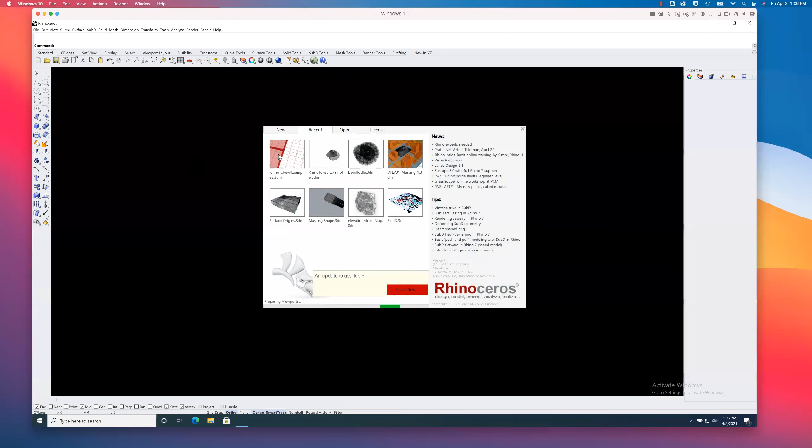We're going to talk about a couple of different ways you can begin to think about your skin or envelope. This is not the only way, but when it comes to thinking about, for instance, curtain wall, some sort of panelizations, I've done a few things in Revit as well as Rhino. I'll talk about that and show you where we're going to go, and then we'll do this from scratch, step by step.

Just waiting for this file to open, which is weird because it was working just fine not too long ago, and I literally was working on this for the last hour and a half or so.

What's annoying is I was trying to figure something out and I never did for one key thing. I guess that's a weekend project for me, in between doing some gardening and cleaning the house.

Come on, I'm kind of getting nervous here. I don't know why this is taking so long, it's not a particularly huge file or anything. All right, unable to zoom, no objects available. Okay, because I have everything turned off.

Perfection. Okay, so I took a piece of, in this case, I think it was some sort of figure-8 Klein bottle thingy-majigger. So I sampled, like if you thought about the figure-8 being swept around another figure-8 or something, it's kind of a weird thing. I sampled just a slice of the pie, so to say. You can see, before I started to break this up into 3 different surfaces, this was one surface that intersected itself right here. I broke that up, and I'll show you how I did that in a moment.

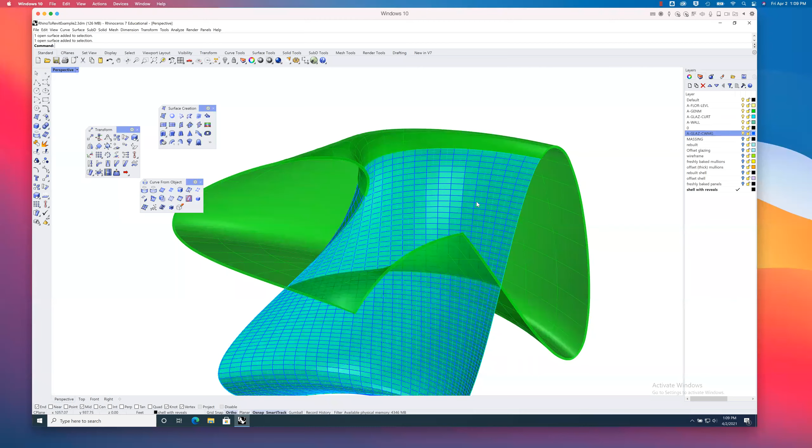So here you can see the glazing. There you can see what I guess was part of the other thing that I offset into a sort of shell. There we go, curtain wall, mullions. I'll zoom in on this a little more so you can see it better.

In this case, I took something doubly curved and instantiated a curtain wall system across it. You can see there are sort of 2-inch mullions running across this thing. You can see the glazing, and actually, well, it's kind of particular, pretty interesting how Revit handled this. In some places it handled it like a pro, and in others not so much.

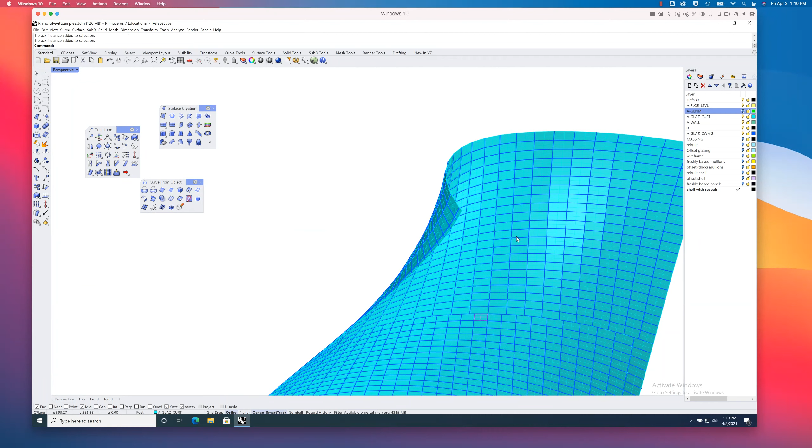Which is kind of interesting. I'm not here to judge Revit, I gave it a pretty hard scenario to try to resolve here geometrically. But anyway, I ended up with something like this from a curtain wall. Again, these are two different sort of systems. I don't like, maybe I was using different parameters for them at the time because I did them at different times, as well as offsetting something, given it thickness.

So this could be a pretty dynamic space where the outside is actually solid because it's facing the sun, and then facing a sort of courtyard over here on the right-hand side, I have basically glass, something like that. I was just ad-libbing here on what this could be, since I was sampling a portion of it without a whole lot in mind. Didn't want to take too long, just thinking of some sort of hypothetical.

So I'll talk a little bit about that back and forth between Rhino and Revit. I'll take this, we'll bring it into Revit, and I'll show you how to do that step by step. It's not intuitive, in my opinion, unless you're really into Revit and importing things from other places into Revit. So we'll talk about the nuances of that, as well as what you can do inside of Revit.

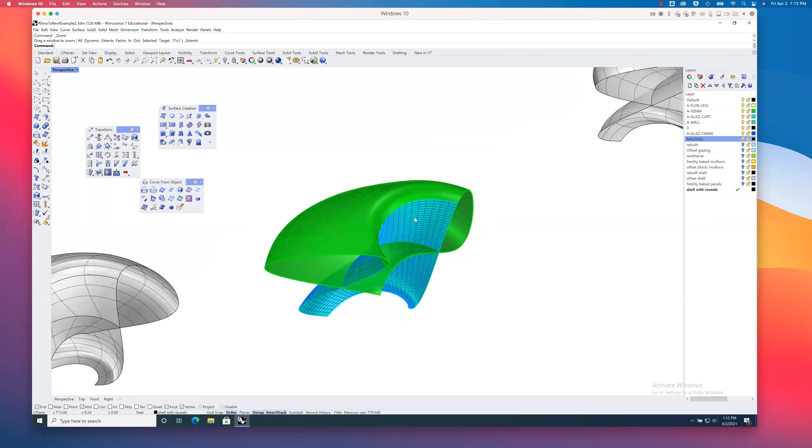Another thing Revit had a hard time doing is I could make sort of curved geometry walls, but it wouldn't let me do wall reveals in them, which is a real pain, because that's how I like to do maybe some aluminum panels, or some sort of zinc plated panel bond or something. So it ended up having to do some things in Grasshopper that I thought otherwise I could probably just do with a couple clicks in Revit.

So here again is another set of examples I did this time in Grasshopper. I'll show you guys again, I'll build that from scratch. What I did is I took the original massing.

I took this sample for what I wanted glazing curtain wall to be. I rebuilt it in Rhino. You can see it's, for a rebuild, as a 1 degree surface, in other words, it's faceted. It matches up pretty well, and we'll talk a little bit about that.

What I had to do is essentially rebuild this patch of the surface, so that since it's a trim, it kept wanting to instantiate across the whole thing. So I just quickly rebuilt it. I'll show you some steps on how to do that really quickly, so it's not such a horrible ordeal.

I offset this a little bit so that I have a typical geometry, and then I have where the glass would actually be. I.e., I used the original poly surface here to instantiate the mullions, and then I used the offset version as actual glass.

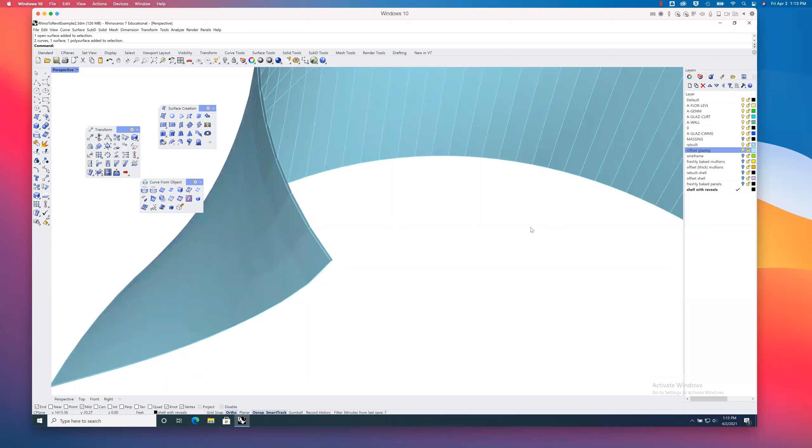Let me just turn the Isoparms off on that so it looks a little cleaner here. Let's see. Extracted wireframe, and then from there it was making some quick mullions. Then from there, offsetting them to give them some thick mullions.

So you can see this system. This one lined up a little better when it came to how I was constructing it geometrically, where you have these nodes, everything sort of matches up nicely. There are ways to fix that stuff in Revit, I'm just not a Revit expert. In fact, if you just Google it, you can find some YouTube videos on just that.

Freshly baked mullions, I love some freshly baked mullions. All right, so there is the Grasshopper curtain wall. And then I sort of rebuilt the shell as well, and then offset that.

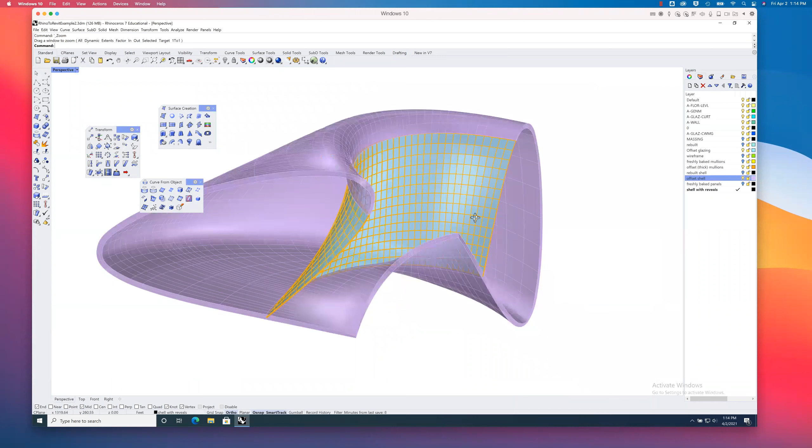Another thing, for instance something solid like this, not only did I offset it, but then I took it and began to panelize it. In this case I turned it into a series of skewed quads, so I have all of these seams and things like that. When you have a big expanse of wall or roof, you understand these things are actually made up of lots of smaller parts, and all of those have joints and seams.

I think that's one of the things I notice a lot, particularly when critiquing third year work in our school. It's like that hasn't really set in yet, that there's line work and joints and shadows and reveals and things. So anyway, I'll show you how I did that as well.

That didn't take too long. If you're using a plugin like Lunchbox Tools, there's a bazillion different options you can use for how to take a large piece of geometry and break it up into smaller paneling. And you can see that all of these are planar. That's a shortcoming here - when you're doing the double curve geometry, when it gets really concave or convex, that's where you have a breakdown.

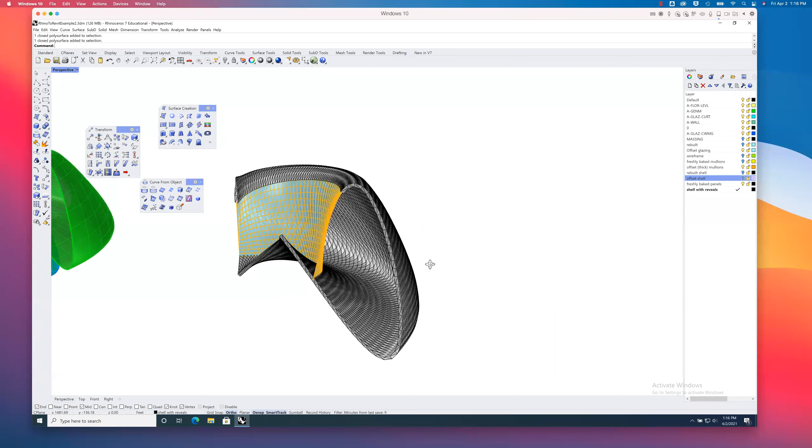Actually, these are quads, so they're not necessarily planar. But we can compensate for that with some triangular geometry instead of quad geometry, if that seems to be a difficulty. But anyway, I just wanted to show you where we're going here.

I started with and meticulously made copies, and tried to be meticulous with my layer management, so that I always have this original geometry if I need to go back to it, if I need to generate something else from it - mullions versus glazing versus shell geometry, or panels, etc.

So if I need to offset something, whatever, I'm always one to sort of keep that original geometry. Even if it's in a different file, I can always import it back in. So let me just save that, and I'll turn some of this stuff off. Okay, here's where the file starts to get heavy, when I have everything turned on all at once. So I'm going to turn all of these things off. Let's go back to the beginning.

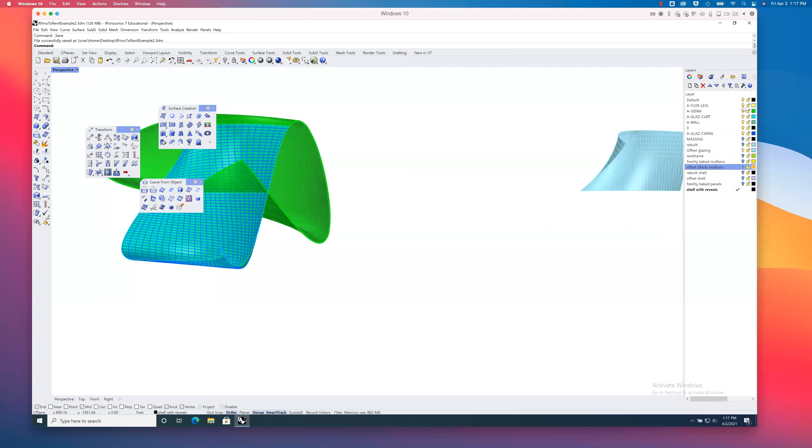Let's talk about the details and the nuances of everything that I'm about to do now. Okay, right. So I'm just going to open up this example. I think I have an example before I started to trim things and split things up. Right, so here this is like a figure 8 Klein bottle. That inside is really sort of wicked, look at that.

I mean, there aren't too many sick, nasty things in this universe, but I think the figure 8 Klein bottle might be one of them. I mean, it's subjective, but I'm not usually wrong about those sorts of things. Anyway, so yes, let's see.

What I did is I simply started to cut a slice through this. Let's go to the top and side and get all 4 viewports. I'm just going to go ahead and get these extra toolbars out of the way. And in this case, I think I'm just going to draw like a box, all of this stuff, and it usually comes down to like drawing a box around it or something. It's the ironic part.

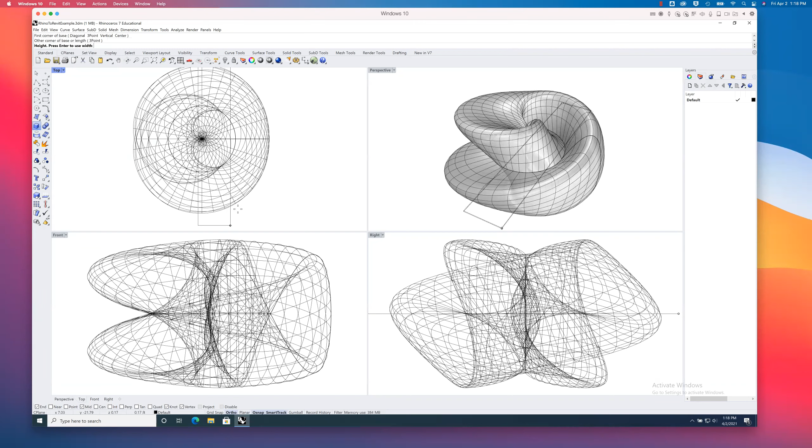And maybe I'll just try to pick a piece like through here or something. I'll start with a slice like that, see what happens. I'm just going to use this to trim other parts of the surface away. So it helped if the box actually went all the way through the surface, wouldn't it? Go ahead and move that down in elevation. There we are. Now in perspective, I think we can get a better sense of what we're dealing with here. All right.

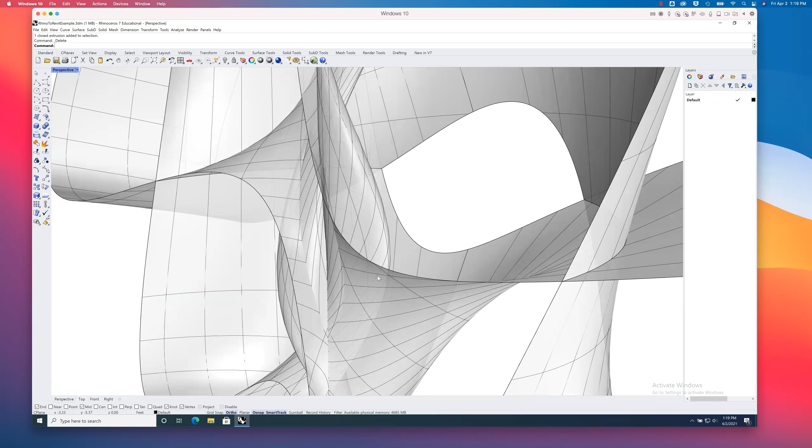All right, trim away. I'll just trim that part too. Yeah, see that, now you know why it's called a figure 8, right? All right. Just delete this part away. I am not going to deal with this situation right now, but suffice to say, I was looking at this and I was saying, man, that's either a very highly sculptural centerpiece, or maybe it's the core, or maybe I blow this away and then have these things situated around emptiness or something else.

But what I'm going to do is I'm just going to look at one wing of this. So I think I'm going to duck out for a moment for the sake of our demonstration. I'm just going to draw another box and start trimming this part away right here. Maybe. There we go. Down you go. All right, and let's see, split. I'll split this with this. Yeah, sounds about right. There we are.

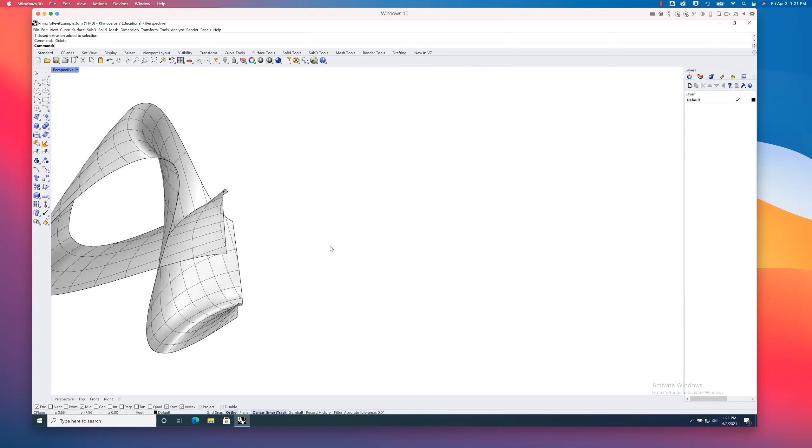Now you notice that where I split, it's kind of awkward in that you can see where the isoparms are, and I didn't split along those isoparms at all. I sort of drew a pretty arbitrary orthogonal box in a couple places. So maybe I undo that, and I'll show you a different way to begin to split things with the geometry of the actual surface. So you can see I sampled a slice here.

Maybe I'll even go back and do the whole thing like this. Yeah, go ahead and just take a look. So anyway, as I start to sample, let's say a slice, later on I can, well, here, sorry. Let me just redo. So yeah, I'm always going to make this seem harder than it has to be, of course. Redo multiple? Okay. Never mind then. I'll just do it this way. So one of the things I'm going to do is I'm going to look at how to split this thing up.

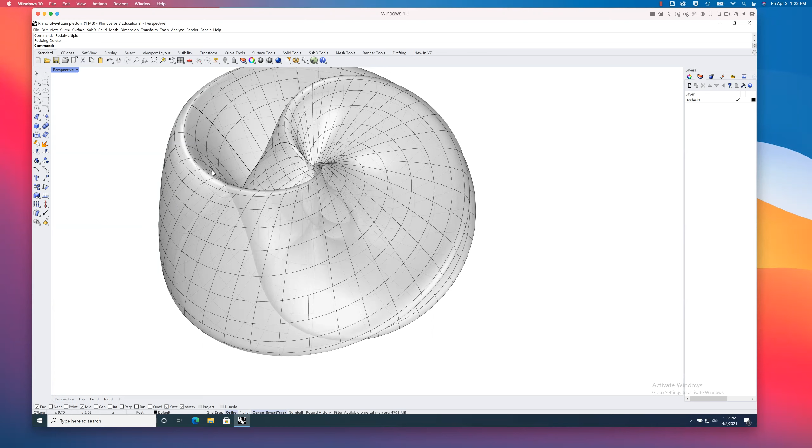And one of the ways I can do that, first of all, this is a periodic shape. So if I want to split it, I need more than one curve. In other words, I need to split it, like take a slice out of it, as opposed to just trying to sort of split it open. So you can see that there's actually a natural seam here because it's a surface that sort of wraps in on itself and then meets back up at the end. So what I'm going to do, first and foremost, is I'm going to go to these tools. The one that's showing at the top here is called Curve From Object.

But in other words, we can start to use or find curves in surfaces here. So the first thing I'm going to do is I'm going to say extract isocurve. Okay, it's this icon that shows the isocurves in both directions along a surface. If you're interested in just typing the command, it's ExtractIsocurve, not a huge surprise there, no spaces, all one word.

I'm just going to select this surface, and now it's going to let me, I don't know if you can see my cursor, but I'm dragging basically a figure 8 along the length of this thing. And if I click in a particular place, I can start to actually create curves. Like let's say there and there. I don't know if you can see those magenta curves.

So now what I'm going to do is I'm going to say trim, and I'm just going to select this curve. Oh, try to select the other curve here. There we are, these curves. I'm going to try to select something out here, right? All right, now I've sampled a piece of the surface. Just going to delete those curves away. There we are.

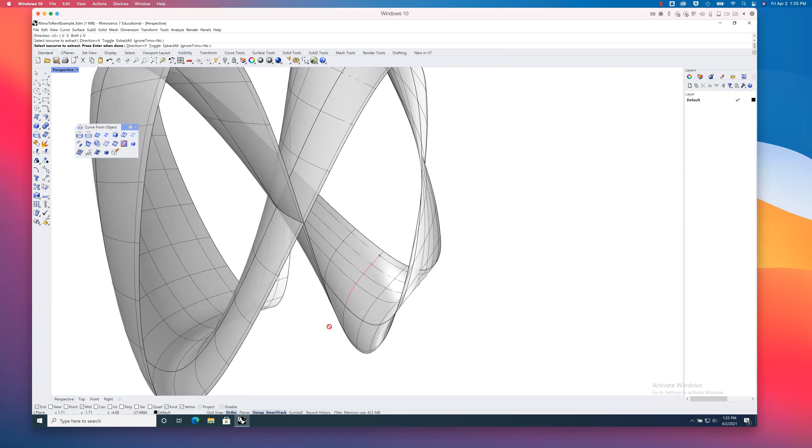Okay. There seems to be another seam here. That's kind of interesting. Oh, I see. Interesting. Just to get rid of that. Here we go. So again, I've made a curve here, and I'll probably make a curve somewhere up here. Let's do that. Again, I'm just extracting an isocurve. And then if I have my knot option turned on for object snap, I can actually snap to where there's a knot or already an isoparm. And that way I can selectively trim things and not have half of an ISO patch showing.

So here we go, trim. Just going to select the two curves I just made, hopefully. There it is. Okay, those two. I'm just going to trim this part away for the time being. And now, last but not least, I really needed to, oh, I think I've already split it. Look at that. I'm not sure how I split that already.

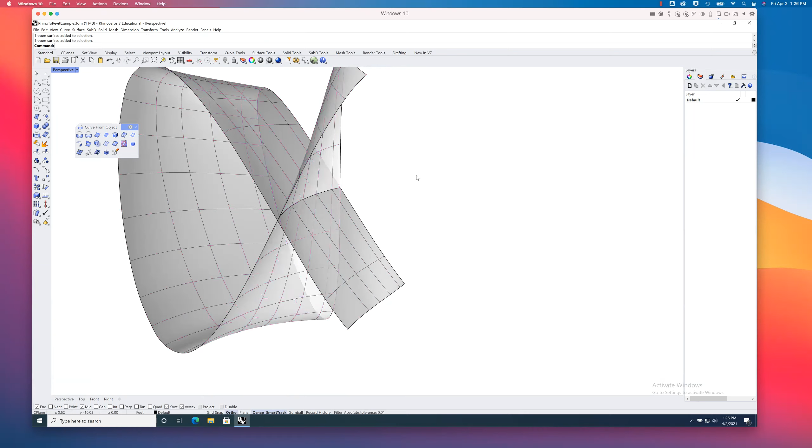But if I think about this for a moment, right? Not all of this is going to be curtain wall. If I'm going to have to break this up into portions that actually are inset and have windows, or change in materials, right? And change in thicknesses and things like that. Then I'm going to have to break this up and make it smarter. So I have this already sort of broken. This already is happening, but let's see.

I'm going to go ahead and sample some more isocurves. I'm going to say that from here on down, maybe, we'd have a curtain wall, and then from up here, we'd have something solid. Or something that looks solid, maybe has punched window openings in it later on, if I want to do that. Okay, so I'm going to go ahead and split this with that curve. Let's see here. Okay, there we go. So now I have this, I have this, I have this.

And maybe it's the same thing down here. Maybe this begins a glass facade. So let's see, go ahead and do that.

So I just made a curve here along that isoparm, and I'm going to use that. I'm going to split this surface with this curve that I just made. All right, so now I have several different patches. You'll see that there's no surface that intersects itself now, right? So I do have to do a little bit of cleanup and thinking about this ahead of time. All right, so I'm going to go ahead and save.

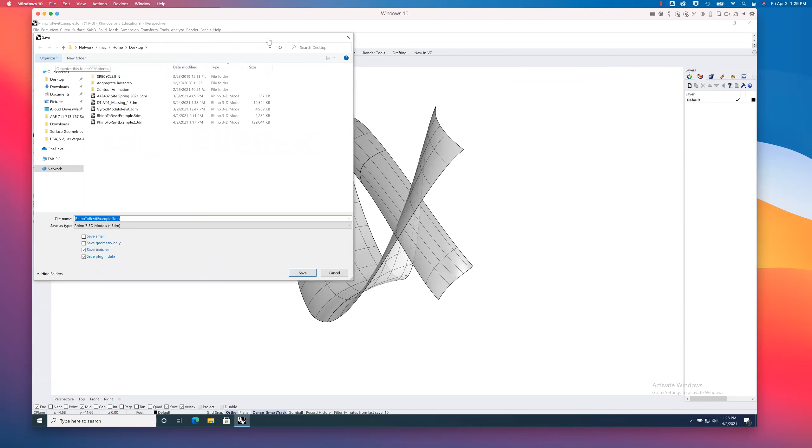All right, let's go. Rhino to Revit example. Sure. Save. Sometime today, preferably. Oh no, I went through all of this. What's going on? Save, you dumb piece of garbage. Yeah, no, I accidentally selected it 3 times. Come on. Yep, there we go. All right, finally, saving. I don't know what that was all about. Yeesh. All right, anyway, I have this.

Now, there's a couple of other things I'm going to say here. For whatever reason, it seems like I could have the units in Rhino set to feet, and then I can set Imperial units in Revit. Then I bring this geometry into Revit, and it seems like it's in inches, and it's like 1/12 the size. I don't know why. It's so annoying.

So the other thing I'm going to quickly do here is just scale this. I'll scale it around this base point here, with a scale factor of 12. I'm just going to scale it up 12 times. I don't understand why it's like that. This is already set to feet, but it is what it is. I'm going to go ahead and save. Now, once I have just the geometry I want to bring into Revit, and it's all prepared, I can go ahead and close Rhino for the time being.

All right. And open up Revit. I'm using Revit 2021, I think, here. It shows these examples with double curvature, but it's not so good with double curvature unless you really know what you're doing here in Revit.

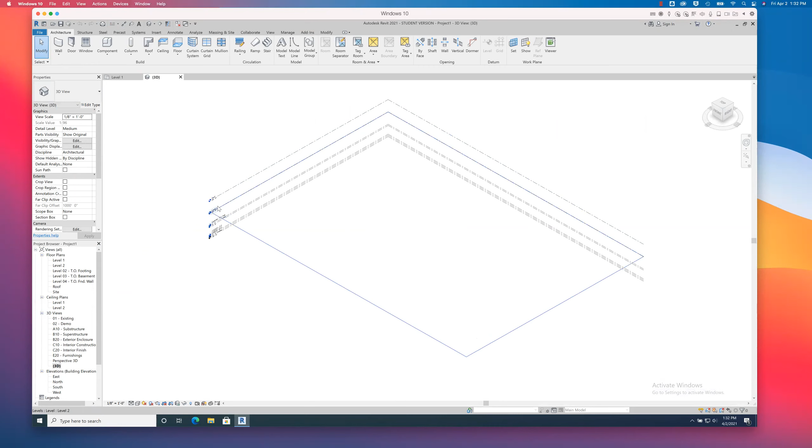There we go. It's just starting up a new file. You'll see a bunch of tabs along here: architecture, structure, steel, modify. That's an important one. Then you'll see a set of menus and properties over here, as well as what's called the project browser. I think we're in top view or something. I'm just going to double click on 3D. You'll see that I'm in an Axon, with hypothetical floor layouts and elevation tags. I'm not going to be so concerned about those. I've just created a new file and set up the view.

So I'm going to go to the architecture tab, go to component, and say model in place, right? Normally if I was going to create something new, this is what I would do. When I say model in place, it gives me a number of different family categories. Since I'm bringing in surface geometry from a different CAD program, I'm going to pick generic model and hit OK. It's going to ask, would you like to name it generic models 1? Sure, Revit, name it whatever you want. All right. And so now I get this create tab.

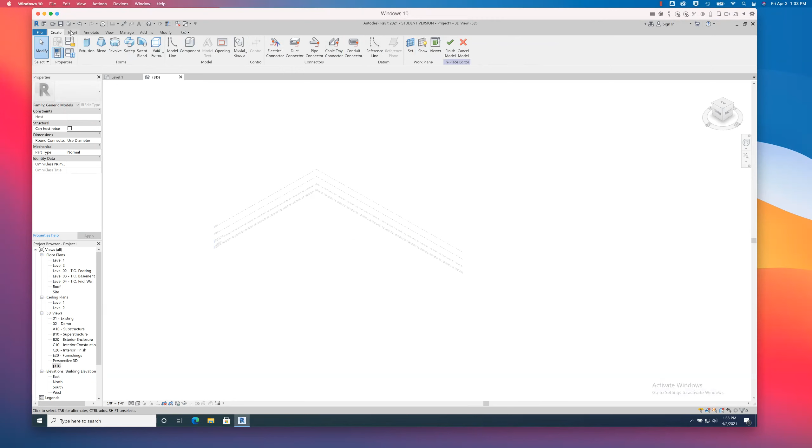I'm not going to hit this finish model yet, because what I need to do is make this component. And instead of creating something from scratch in Revit, I'm going to go to the Insert tab up here. I'm going to say Import from CAD. Okay, there it is. And now I can look at the file types that can be imported. DWG, not a big surprise. That's an AutoCAD file. DXF is another Autodesk file exchange.

DGN is from MicroStation. We have SAT, which is a file type that preserves a lot of different geometry types, but it's kind of generic. It's not specific to a brand. SketchUp files, if you're fancy like doing stuff in SketchUp and bringing it into Revit, you can import those in natively. Same with Rhino. So I'm going to pick 3DM, and let's just go to my desktop here. I think is where I was saving this, I hope. And it's this one right here, saved at 130. There we are. Okay, didn't give me any errors, so that's always bonus.

What I'm going to do is I'm just going to rotate this around. I don't have the right kind of mouse apparently for Autodesk. I'm using the Apple mouse. So again, it shouldn't be so hard to navigate your way around the screen in Revit, but it defies all logic to me. There's no muscle memory in my body when it comes to clicking and dragging around the screen here. There we go. I think I'm holding down Shift and using my right mouse button.

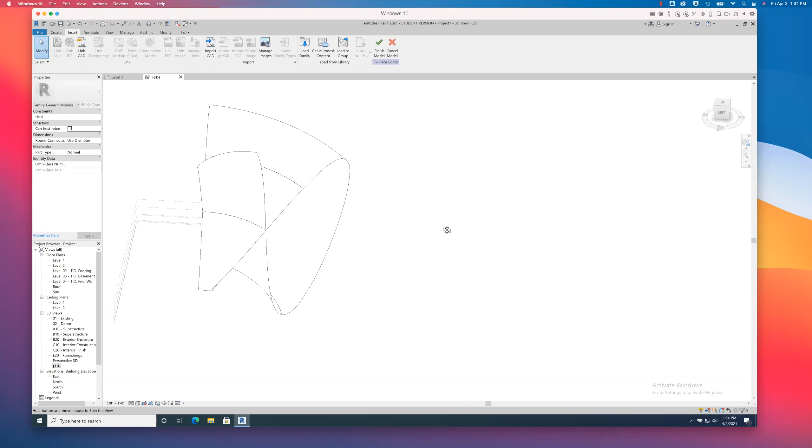Okay, so you can see that I have a number of different sorts of geometries. I'm just going to turn it the way we were looking at it in Rhino before. Maybe over here I'll say zoom all to fit. Let's just get it all centered up there. All right. This looks like it's loaded in correctly, so I'm going to go ahead and now hit finish model. That's really important. It's easy to forget. And so I'm going to go ahead and just save the Revit file.

I'll call this junky delete me later. That way I know what it is.

Okie dokie. And so if you'll remember, I mentioned several things. One is that I was going to add glazing to this crisscross portion. It's sort of crisscrossing here in section. And then I was going to make this into a thicker shell, and then see if I could articulate it into something more architectural. Thinking about paneling or giving it some reveals or something like that, to break up a really large piece of geometry and break up the scale and give it a little more of a sense of architectural geometry and material seams and joints.

So first things first, let's look at curtain systems. I'm in the architectural tab. You'll see that we'll be using wall. In fact, we can make walls from faces of surfaces that we brought in. We'll do that in a minute. There's that component button again. I'm gonna go to curtain system, curtain wall system. It's gonna bring up, I think by default, a 5 foot by 10 foot curtain wall system, at least on my machine.

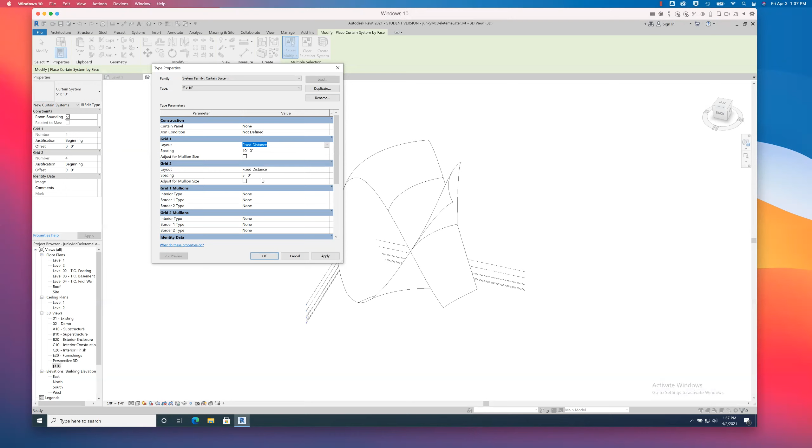Okay, so when I click that button, the curtain system, it's gonna bring up the properties box for the curtain wall system. And usually in here, I can search for different curtain wall systems. I can edit it. I can duplicate it and make my own if I wanted to make a custom one. You can see that there's a number of parameters here I can adjust, like the spacing in one direction versus the other direction, 10 feet by 5 feet, right? Is it a fixed distance? You can also say a fixed number or maximum minimum spacing. And then also the types of mullions, right? So I'm just gonna say okay for the time being.

And I'm gonna say create system. We'll go back to that properties box in a minute. Create system, select multiple. I'm just gonna go ahead and select this. Let's just look at it. See, it turned blue. I'm gonna say create system. All right, I'm just gonna try to zoom in here ever so carefully. You can see that it actually created 5 by 10 glazing, right? So I have these quad panels, like it took that doubly curved surface and basically made it into a set of quad planar glass panels.

I can always go back and say edit type. Doesn't have any mullions. I can go to grid 1 mullions and I can start to change what kind. Let's say rectangular mullion 1. Sure. Rectangular mullion 1. Let's go ahead and apply and then hit OK. It'll take a second and populate this hopefully with some rectangular mullions. Aha, in fact, there they are.

Edit type, and again, I can go back in here and start to change things around. Border 1, border 2, etc. Let's see what those are. Oh, okay, all right. I'm gonna go with quad corner. Let's see if that actually changes anything. Maybe it cleans some things up or not.

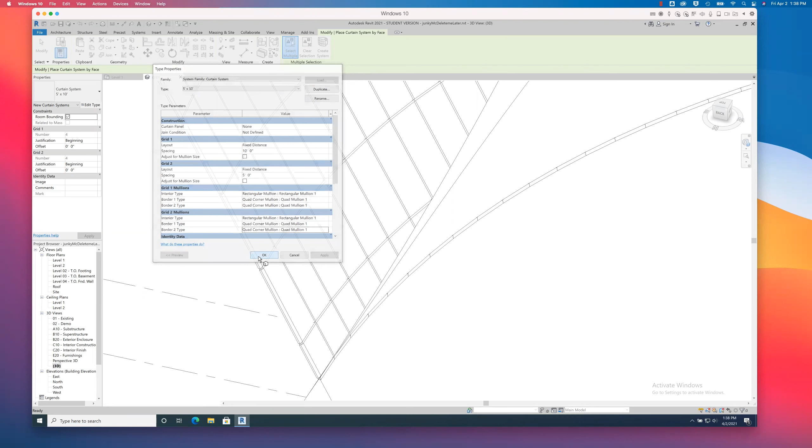Oh, never mind, I'm just going to undo that. Just turn those off. None. Anyway, I'm just playing around with the curtain wall system till I get something I like.

What? Huh? Not sure. Curtain panel.

Oh, glazed, sure, fixed distance 10, 5. Again, with fixed distance, you'll notice that if we get to an end and have like 2 inches of leftover space, it'll look kind of funky, but we could do a fixed number instead, like the number we want to cross. I'm just going to hit apply and hit OK one more time.

Hopefully we do. All right, let's see, we have the system.

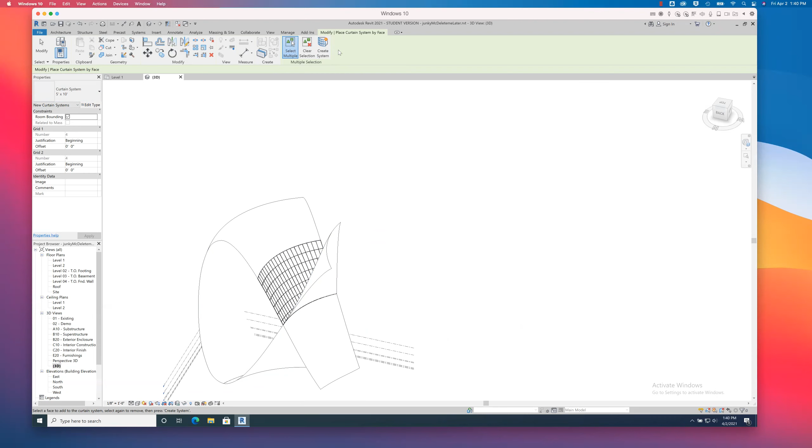I'm not going to worry about room bounding and things like that. I'm going to say select multiple. I'll go ahead and select this one. Why not? Create system, let's just do it.

I think we can all appreciate when it happens at a click of a button, even if we have to wait a couple of seconds for the blue wheel to keep spinning. 75.

There we go, right? All right, curtain wall.

You can see it did some stuff here. Oh, well, maybe you can see. Actually, no, we can't see. Come on, there we go. It's actually kind of hard to see, ironically.

We have a seam here that we probably need to clean up in Rhino. Maybe there's a mullion going that direction, but if so, what a fortunate coincidence.

I'll do it one more time. Select and, yeah, I just selected it. Come on. Yeah, create. Okay.

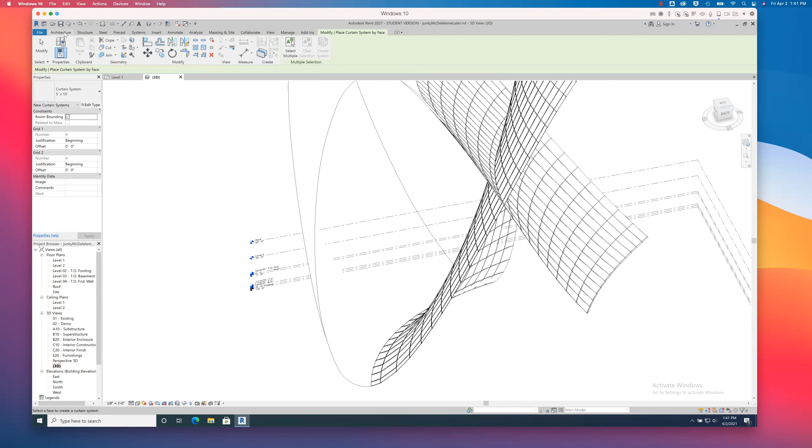So there's some curtain wall. Let's say the other thing I might do is, again, I can take faces and surfaces and convert them into wall geometry. I'll try it here.

I'll go to wall and say, instead of wall architectural, which gives options for drawing in plan, the sort of shape of a wall, I can articulate other parameters like the kind of wall it would be. If we're talking typical wood stud, 16-inch on center, versus metal stud with air gap and masonry hung on top, or whatever it is, right? More than you ever wanted to shake a stick at, sort of designed by pull down menu.

But I'm just going to say wall by face, and select this face. Then I can pick the type of wall, and I'll just say generic 12-inch wall. I'm just going to undo making that a wall.

There we go. I can change this to 12, and then say okay, wall by face. Select this again, it'll get a little thicker, right? So that basically takes a sort of paper thin surface and thickens it up into a sort of wall system. I made it generic so that it wouldn't be anything in particular here.

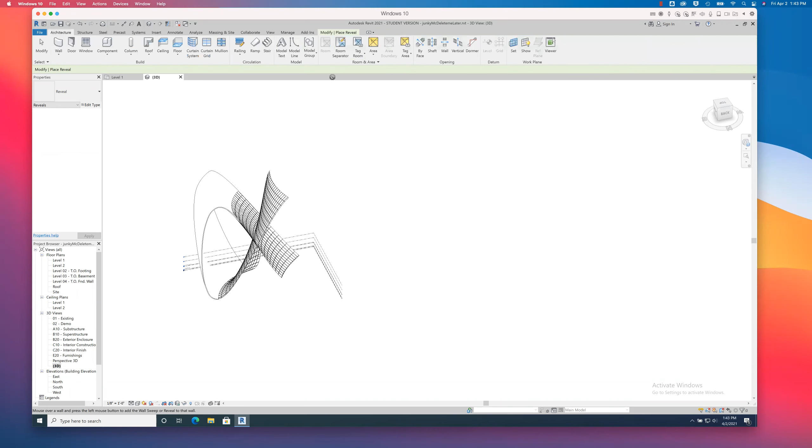But anyway, I just wanted to go through that. Here we have curtain wall, we do have other mullions. You can, if you start with a curtain grid, then specifically add mullions at different places along that grid. But the curtain system is really nice because it takes advantage of that repetition, particularly economy of scale. It just does it for you, which is really kind of a nice thing.

So let's say at this point, I'm ready to bring this back into Rhino.

I've done what I can in Revit. I'm going to have some floor slabs in Rhino that I'll add to this, cut out some holes, make some windows, whatever. Maybe I'm ready to do that. Let me save the Revit file so I can always open it back up, re-export, or change something, like the parameters of this curtain wall system, if I need to.

Now I'm going to go to File, Export, CAD Formats. I'm actually going to pick DWG. So export CAD formats DWG. What's really nice is that these days they've made DWGs a little better.

This is to export the geometry back into Rhino. I'm going to export as a DWG, and it's going to pop up with a DWG export box asking if this is what I want to bring in. I'm just going to hit these settings, the dot dot dot, and it'll bring up a box with layers, lines, patterns tabs. I want to be careful and preserve solids as solids rather than converting them into polymeshes. Back in the old days, DWGs would just turn everything into polymeshes. Now there's an ACIS solids option, which is good.

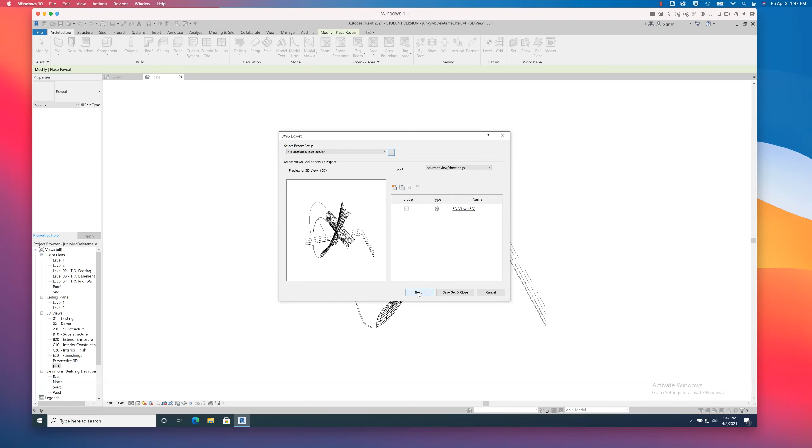Anyway, I'm just going to export this out as solids. That's really important, you want to make sure these are preserved as solids. What that does is it preserves things as poly surfaces, not a bunch of unwieldy meshes. I'm going to hit OK and then hit next, and I'm just going to leave this as default, AutoCAD 2018 DWG, whatever, and I'll say...

I am dead inside after trying to make wall reveals and curved walls in Revit. I do feel dead inside.

And hit OK. So I just saved the DWG out, exporting this out, making sure everything's preserved as ACIS solids. That's what I'm going to import back into Rhino.

As soon as that's done, I think it's safe for me to close out Revit at this point. I'm going to import it back into the file I exported out to Revit so we can compare what we took from Rhino into Revit and what we're getting back out and putting into Rhino here. Just go ahead and open that up, and I'll show you the import process, which is actually quite easy.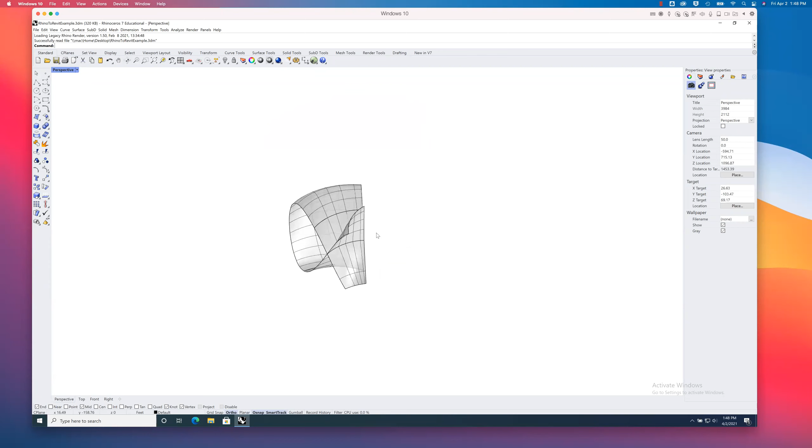The only crappy part is that it'll be scaled, still 12 times as big, and we'll just scale it down by 1/12. It's really kind of crazy how that worked out, I don't understand it at all. Let me just select all curves here and delete those.

Now that I have this open, I'm going to say File, Import. So we can import, let's say, something else - I am dead inside dot DWG. Okay good, say that five times fast. I'm just going to leave this as the default and hit OK.

Like I said, I'll probably just have to scale this back down to 1/12. Again, I do not understand why, it defies logic to me why the unit scale factors just don't match up going from Rhino to Revit. I suspect it's not the case if I was doing a DWG from AutoCAD, so it must be a Rhino thing. Rhino 7 scale and units, when bringing things in and out of other programs, just doesn't work so well. I don't understand how they broke that - it seemed to be one of the things Rhino was good at back in the day.

All right, so we're just waiting for this to import in. It's about 5 megabytes of lots of solids and poly surfaces for each of those mullions, which are basically just boxes. That's essentially how Revit does this stuff.

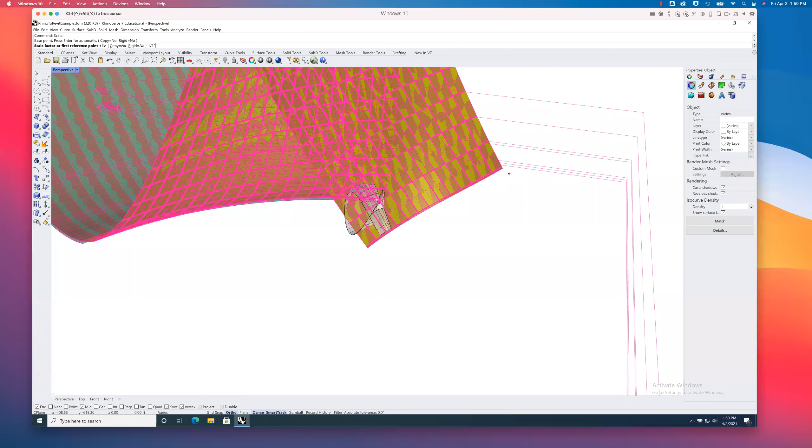Yeah, here we go. You can see that's much too large, so I'm just going to go ahead and type in scale right now. I'll make the base point over here because I wanted this to be a little farther away from where I started so we can compare. I'll use my scale factor of 1/12, so 1/12 of the size, quite literally the fraction. You can see there it is, in all its glory. All right, so let's talk about what we got out of this.

First of all, we got rid of those annoying elevation tags, which are right here, floor levels. I'm just going to select all the objects in that layer and delete, because they're just kind of dumb curves at the moment anyway.

Let's see what we have here. Oh yeah, I don't know why they picked these putrid layer colors. I mean, they're truly awful, I don't get it. There, that's better. You're like, what makes that a good color for me? I don't know, I just like it.

There's, let's see, glazing. Let's change the color of that. To orange, of course. There we are.

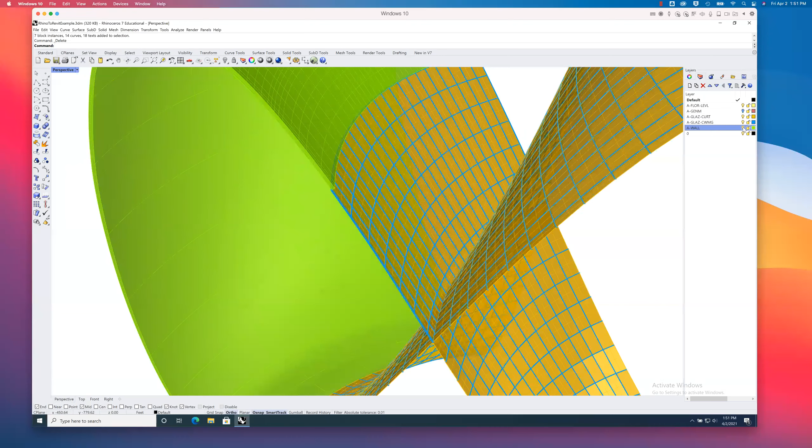All right, I'm actually just going to turn this off. That's the wall we created, right? Yeah, sort of thickened stuff. You can see here we have pretty much everything that we brought in from AutoCAD, or from Revit, sorry.

Yeah, this one looks a little cleaner than the one before. It's still a little goofy, but again, there are ways to clean that up if you're really interested in doing non-conventional things in Revit. It's actually a pretty powerful tool, it's just not so easy to get under the hood with things there.

There was the original geometry that we fed in. It's still there as a set of surfaces. Yeah, okay. All right.

So that's basically how I can go back and forth between Revit and Rhino if you need to. What I recommend is, if you're working primarily in Rhino, take only the stuff that you need to bring into Revit and export it out as its own file, import it, open it in Revit, or sorry, I guess it's insert from CAD into a generic model, right? And then do what you need to do, and then you can export it back out as DWG and bring it back into Rhino, put it into place, make sure it's the right scale and everything.

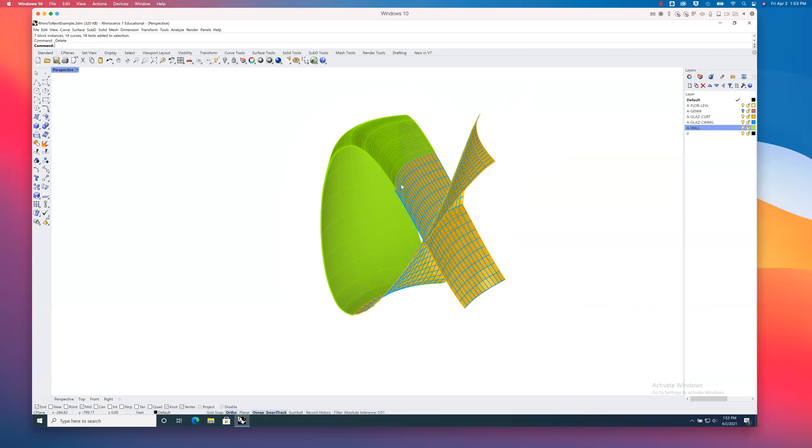Okay, so that's why I broke things up and did some splitting and trimming ahead of time. Okay, so now I'm ready to reinsert my floor plates in here and start to add maybe some furniture and show some stuff like that.

I would say that there are also some easier ways of doing some of this stuff. Sometimes people find it easier to do something in Revit or Rhino or Grasshopper. I'm not here to judge, I'm just here to show you all the different paths, lots of different paths, and you can experiment and find the one that works best for you.

So I'm going to go back to this original, and I'm going to make a copy of it over here. And we'll use that, and we'll do something interesting with it here. Just a moment, let's see.

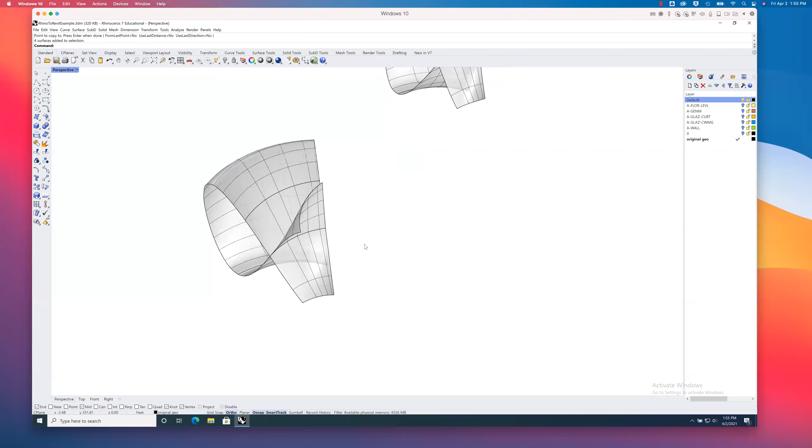What I'll do is I'll make another layer here, and I'll call this original geometry. I'll select that, and I'll put that on this new layer I made called original geometry. I'll even go back in and fix the typo I put in the layer name. I'll make that the active layer, I'll turn this old one off. I always want to make sure either in the same file on a different layer that I can lock and turn off, or in another file, that I have this original geometry still, just in case. I don't want to do something potentially destructive and then not be able to go backwards if I need to, right?

So now I'm going to go through a couple of workflows that you can use in Grasshopper. Let's see, depending on what you're trying to do, really, it all depends.

There we are. Recent files - let's see: curtain wall, paneling, and then wall reveals.

Wall reveals is the one I just could not get to work. It really drives me up a wall - just not my day for putting in nice crisp wall reveals for shadows, and I just, darn it.

Anyway, curtain wall - let's start with curtain wall. I'll go through this step by step, but this was stupidly easy for whatever reason. What I did is I bring in a surface, carve it up - did it a million different ways. I populate it not only with points, but then I find the normals at each of those points. And I take those normals and start to loft them together as lines along the facade in order to create basically a paper thin mullion.

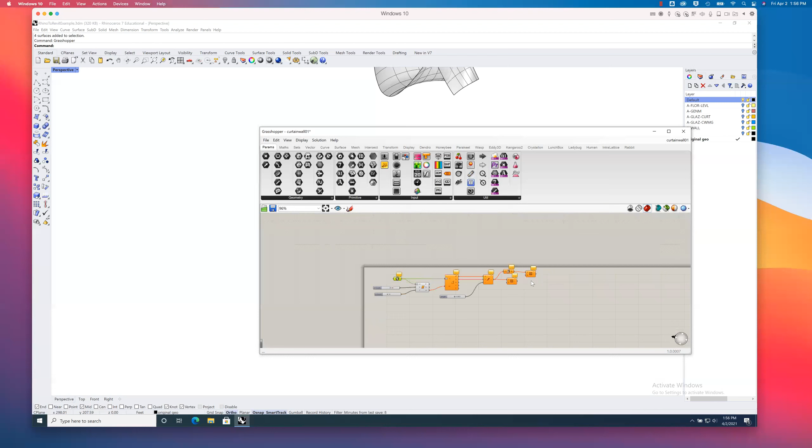And then I can - oh, did I not save? Oh, and then I can just bake those. I can offset them into thickened mullions back into Rhino. Yeah, all right, so that's basically what this is.

At a certain point I get a data tree out - here are all the normal lines going along in this sort of longitude, right? So each longitude line, or each longitude isoparm or mullion, is its own sort of branch. So then I have to flip the matrix, turn longitude and latitude, and do it in the opposite direction as well.

All right, let me just show you how this works. New document. Now here's the interesting thing - did you notice that Revit turned all the glass panels, all the rectangles, all the quads - turned this doubly curved surface into a set of planar quads? And we're going to do the same thing in Rhino before we even start.

So if I know that I want to take this and make it into a curtain wall, I can essentially rebuild it here in Rhino. I'm going to do that right now - I could do that in Grasshopper, but it's actually just easier to do it in Rhino right now. I'm going to select this, and the command I used was rebuild.

Okay, rebuild - so what it's going to do is bring up a box, the rebuild surface box. It's going to tell me the current point count in U and V - the number of isoparms, the longitude lines and latitude lines - and also the degree of curvature. A typical surface you're using in Rhino is a third degree surface. If it's planar, then it's usually a first degree surface.

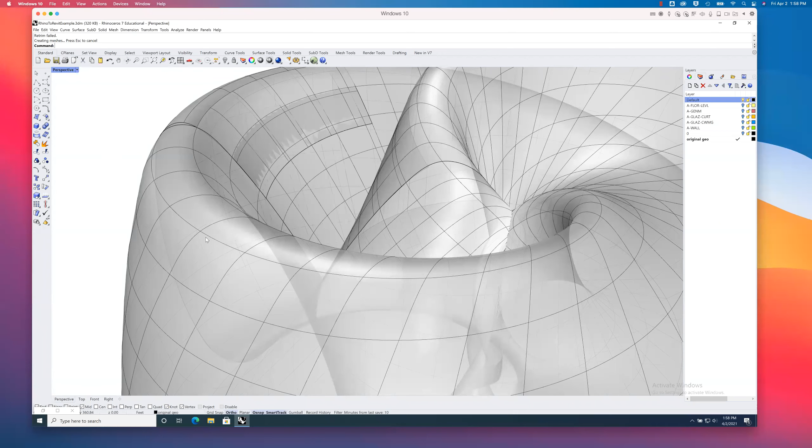So first and foremost, I'm just going to do this - I'll just keep these parameters the same. I'm going to say preview, hit OK. When I rebuild the surface, look what it does - it brings back the entire surface that I trimmed from, which is not good, right?

So what's interesting about this is that the way Rhino works, it's a NURBS surface modeler, and NURBS surfaces are stored as quadratic equations in the actual file itself. So when you trim a NURBS surface, it still remembers that larger surface, and then remembers that you trimmed it, and trims it out every time you open up that file. So every time you want to do something to that trimmed patch of a surface, it's going to do it to the entire surface because it remembers that entire surface. So what we're going to do is I'll quickly show you some easy, painless ways to rebuild this - again, it's all about file management, and I think also layer management in order to do that.

I'm going to go ahead and make this one - I'm going to call this wireframe. And I'm just going to take this, and again go to the curves from objects tool palette. I can do things like duplicate the border of this, I can extract the wireframe - I'll just do extract wireframe. And I'll go ahead and delete that original surface. Now what you'll see is that I have all of those curves that were the isoparms - they're now curves, and I deleted the surface away, so now I just have those curves. I'm just going to undo that.

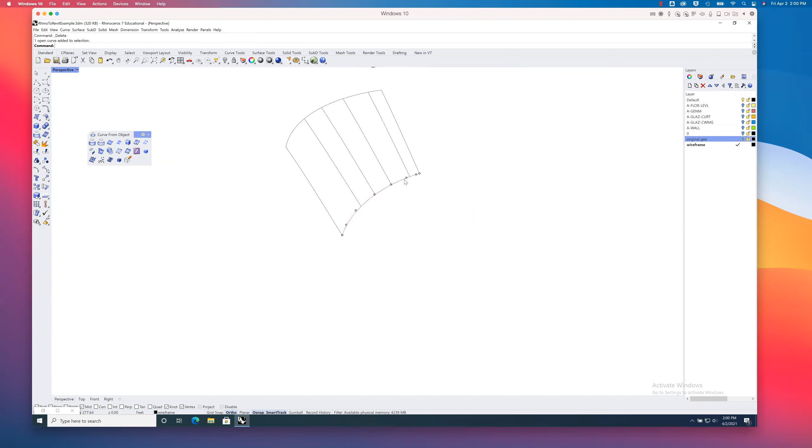I'm just going to make the wireframe layer the active layer before I make the wireframe. There we go. All right, now I can delete that surface away and I can turn all the other surfaces off for a moment. Just look at the wireframe, right? So now quickly I can rebuild this. I'm gonna go to my surface creation tools.

What I can do in this case, probably I have a rail here at the bottom and a rail here at the top, and then a couple of cross-section curves. That'll give me something super duper close to the original surface that I had, and I won't lose much fidelity there. So say select first rail, second rail, all the cross-section curves. Bam, there we are.

Go ahead and delete that wireframe. I just selected all the curves again, deleted those away. Right, you can see that it's not really missing a beat here. That seam is pretty good. Now I can go ahead and rebuild this. So I say rebuild. Yeah, why not? Let's rebuild it.

Now when I hit preview, look at that. I'm rebuilding at 40, 41 in one direction versus the other. That seems pretty extreme. So I will do instead, let's see, 24 and 12. Let's see what we have here. Preview. It looks okay. Now instead of making 5 by 10 foot panels, I'm telling it to divide a certain number of times in each direction, right? Which was one of the options in Revit. If let's say we're making a custom curtain wall and each panel is potentially different.

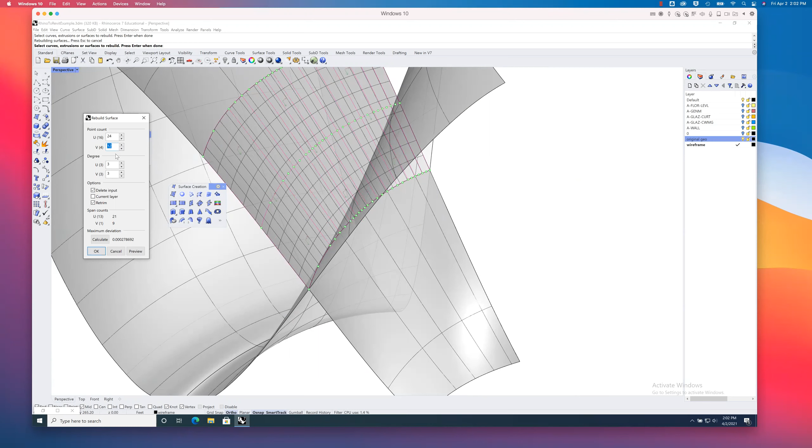Now, let's span control. Let me just up this a bit. Yeah, that looks a little better. Maybe, well, maybe I had it better before. Who knows? Let's see. Let's go with 36 and 18, something like that, like a 2-to-1 ratio here. Preview. It doesn't look so bad. I'm going to hit OK. All right, now we have a fairly clean surface.

Now I'm going to go ahead and do rebuild one more time. But the other thing I want to control here is the degree of curvature. I'm going to turn the degree to 1 and 1 in both directions. Now I'm going to hit OK. Now what that does is it converts this into a sort of quad faceted surface, right? I'll do it here just so you can see, so you believe me. When I convert this to a first degree surface, do you see how it becomes faceted?

All right, so anyway, I'll do the same thing here with this one, but with different parameters. Of course, I have to remake the surface first. Let's see here. So first things first, wireframe is the active layer. I'm going to make one more layer. I'm going to call this rebuilt. And I'll put this rebuilt thing on the rebuilt layer here. That way I can keep using my wireframe layer to make wireframes.

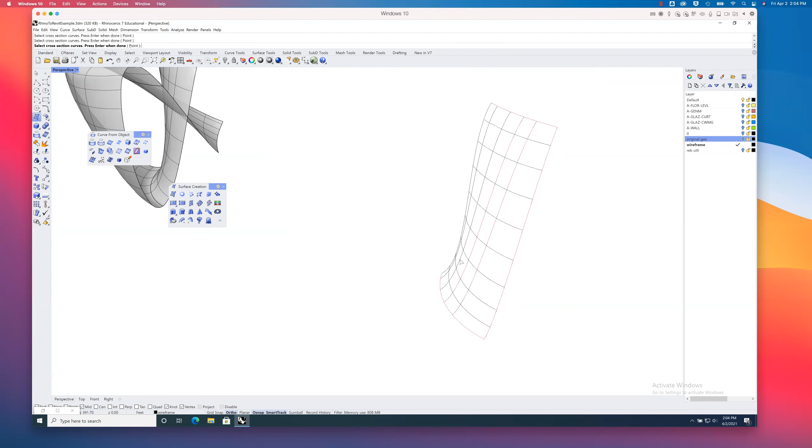Let's see, I'll do the top and the bottom, and then I'll give it these cross-section curves here. Why not? Make sure to put them in the right order. Okay, so now it's its own original surface again. That's always helpful. I'll turn this back on. Turn that off. I'll go ahead and delete this away. Turn this back on. There we are. All about layer management here at this point.

Rebuild. Go ahead and rebuild the surface similar to the other one. Let's see here. I'm actually going to turn that layer on and try to get a similar density here. 18 looks about right, but then this needs to get much larger. Let's go with like 72 maybe. Hit preview. Oh, that's not the right direction at all. All right. Anyway, double that. Let's see what happens here. Let's increase it a little bit. That's much better. Okay.

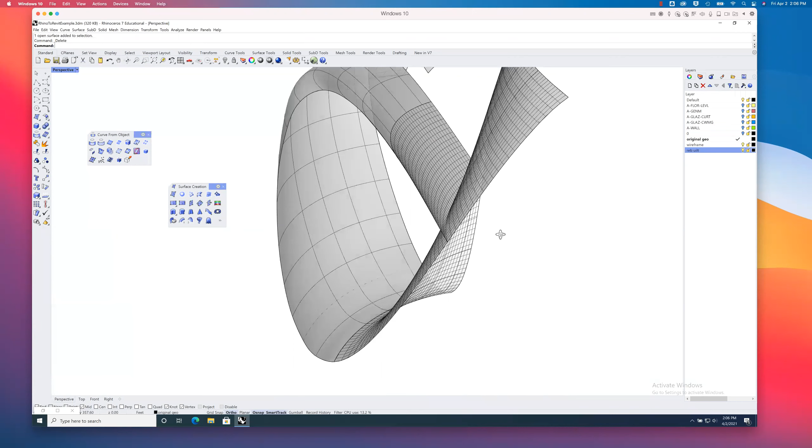And again, hopefully you can see that this is actually a faceted surface. Here, let me recenter myself here. So I don't know if you can see, but there's actually a seam there, right? It's not smooth. All right. I'll go ahead and just delete this part away for the sake of doing this more quickly.

So again, I'm just rebuilding. First of all, I'm recreating the surface, then I'm rebuilding it with specific parameters to generate the sort of spacing, and also turning down the degree of curvature from a 3rd degree curve to a 1st degree curvature, which turns it into a set of faceted quads. This is still one surface, by the way. Now I can bring this into Grasshopper. I'll make a surface widget, set one surface. I'll just sort of show you how I got this. There it is.

This should be in the rebuilt layer, just making sure. I'll turn these layers off for the time being. We'll just look at this in Grasshopper. Yeah, I have to remind myself what we're doing. Oh yeah, we're dividing the surface, and then we're evaluating at each of these UVs. And then we're taking those normals, making lines, and we're lofting those together.

That was such a nice, elegant way of doing it. I'm so smart. Anyway, you're like, yeah, eye rolls.

All right, divide surface. Yeah, why not? Of course, we're going to need a surface. We're going to need a number of divisions, and the number of divisions is going to be some sort of slider. Constrain that to integers. Start with 1, since we don't want to divide by 0 ever, because mathematically it just doesn't work. And I'll give it something totally silly like 100 as the max. And I'll copy and paste that.

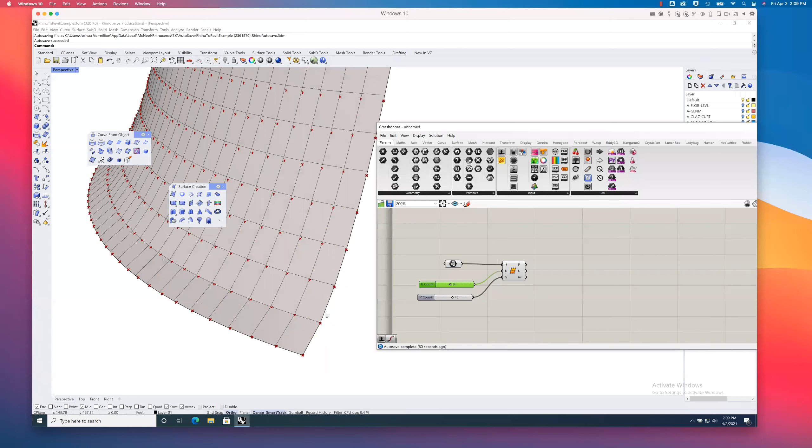Now we'll split this surface a number of times in U, a number of times in V. And of course, we'll change that. So what were we doing? 16 by 48 or something, maybe? Could be. Here, so I'll turn on my rebuild version. And that, of course, is not correct. Maybe it was 18. What was it? 36. And then what was I going in this direction? I can't remember the parameters I used, which is such a bush league mistake. I should know better than that.

I can't remember the rebuild parameters I used. Oh no. Anybody remember that offhand? Okay, the answer to that is no. Really? Really? Nobody remembers? Just hanging me out to dry. It's so sad. Sad for me. Okay, well, it's less than 60. Crickets, I know. Throw me a bone here.

48. I swear it was 36 and 48. Huh. Interesting. Well, we'll try that, but we'll see one way or the other. Should have written those down. Silly me. But another thing I'm going to do, so I have those UV coordinates for each of those points, which is really handy. I'm now going to evaluate the surface at each of these UV coordinates.

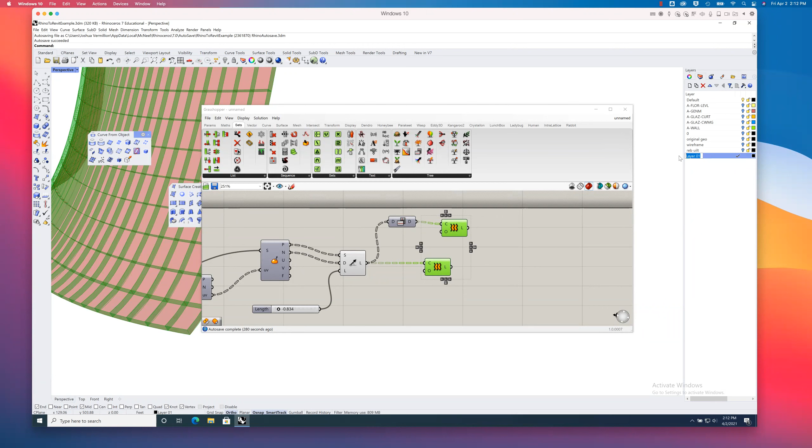Baked mullions. Not to be confused with baked muffins, which sound delicious right now. Get me some freshly baked mullions. Dig in. Baked mullions.

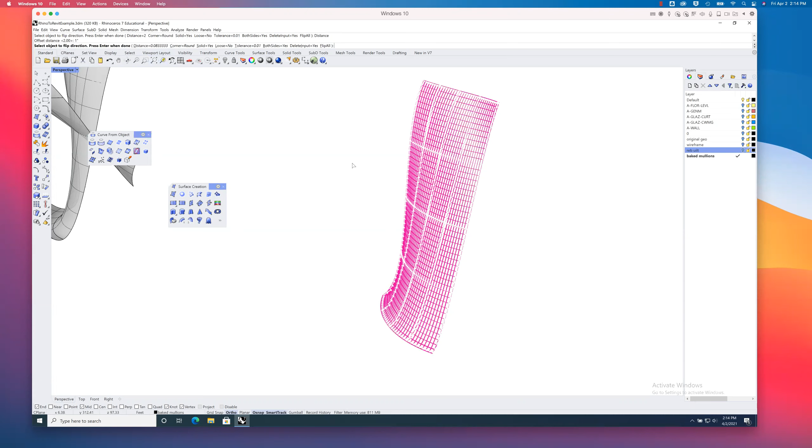And it doesn't matter which direction is the normal because I'm offsetting off both sides. There we go. Now I have thickened solid mullions to go with my glazing. All right. So that's essentially what we're doing here.

Right? I don't remember what the number was here. 1, 2, 3, 4, 5, 6, 7, 8. That's the one thing when I rebuild these, I should have written down the parameters I used. Actually, I guess I can do that by simply doing a rebuild and looking at the starting parameters here. Looks like it's 36 by 18. All right, 36 by 18.

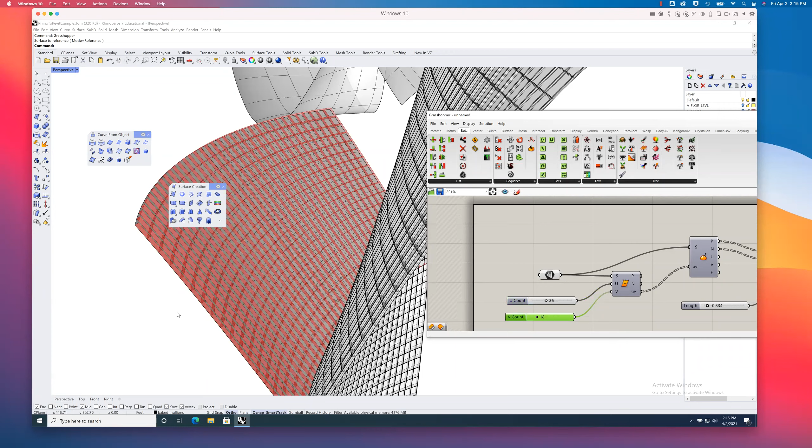So I'll go into Grasshopper and I'll select a different surface, this one. I'll make sure that this is set to 36 by 18. There's just this one I have to change. Let's see. All right. Works for me. I'll bake these in. Get me some more baked mullions. All right. Go ahead and minimize that.

So let's see. Select the last. And let's offset surface these bad boys. Solid, yes. Both sides, yes. Distance, yep. All right. I guess I have to do the same thing here, but you can see where this is going, right? Let's see. Original geometry. There we are.

The other thing I was going to do is show you the panelization tools. You can do this yourselves in Grasshopper pretty hands-on if you want to be. But I was going to show you a couple of tools that are in Lunchbox Tools that'll help you with this. So what I'm going to do first is I'm going to offset this. So I'll do an offset surface here, sort of turn this into a shell, essentially.

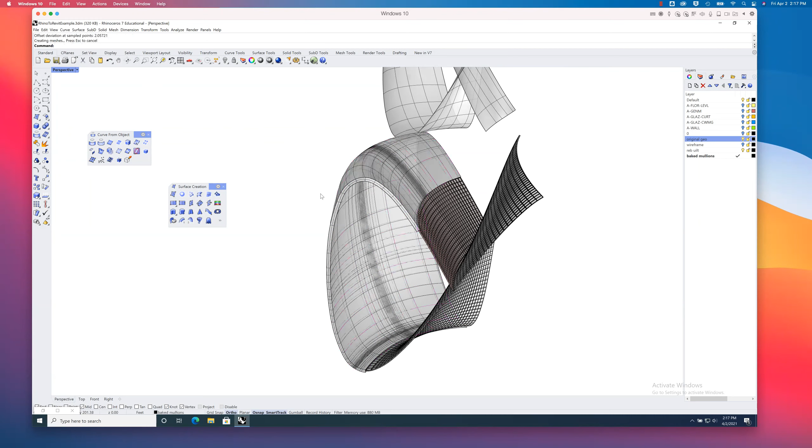Select surfaces or poly surfaces to offset. That one looks like a good one. Distance will be different. Solid, yes. Both sides, yes. Distance. In this case, this is going to be a nice thickened thing. I'm going to go with 18 inches both sides, so it'll be 36 inches total here. We'll go extreme. Give this some thickness. There we go. All right, there's the shell.

I'll go ahead and make a new layer for it. Call this shell geometry. Shell geo. Turn off that original geometry. There we are. All right, shell. Oh, you know what? I don't need to do that. Here's the problem, right? If I offset this and then I start to do something with it, it's going to remember that entire surface again, right? So I need to rebuild this as well.

Oh, rats. All right, so I'm going to go ahead and turn off the baked mullions. Turn on that wireframe layer, make that the active layer. I'm just going to rebuild this really quickly. So I'm going to extract wireframe from it as well. Extract wireframe. Turn off that original geometry. There we are. Oh, Grasshopper's still on. Turn that off for the time being so that disappears. Okie doke. Here we have some curves. More curves than we can shake a stick at.

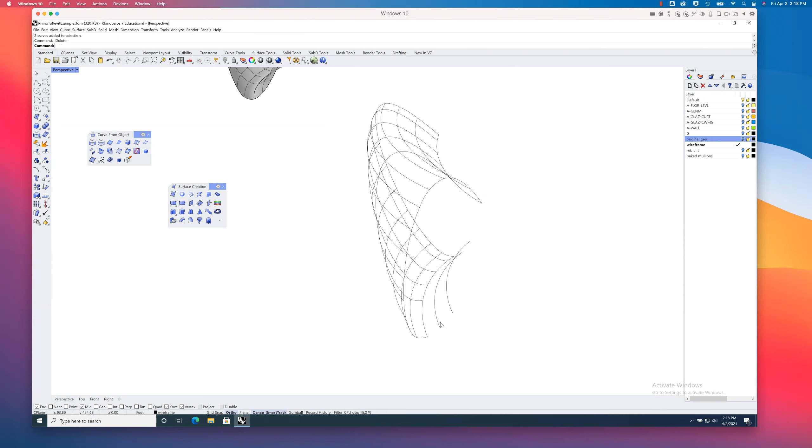I'm going to go ahead and delete these curves. I'm done with them. Delete. Delete. Delete. Delete. Oh, look at that. It's gorgeous. It's incredible. I'll never get better than that.

So I'm going to go ahead and turn it into a surface with the sweep 2 rails. There we are. That one and that one. Oh, apparently I have 2 curves here. That's not going to do. All right. There we go. Take 2. Sweep along 2 rails. First rail, second rail, cross-section curves in order. Ta-da! Not a big surprise there. A little cleaner now. I'm going to select those curves from the wireframe, get rid of them.

So there we are. I need to offset this and turn it into a shell, don't I? Yep, I sure do. Now I'll call this shell geo. There we are. And I'll turn it to that layer. Now I'll go ahead and offset surface. There we go. Offset surface. Boom. Distance 1.5. Solid, yes. Both sides, yes. All right. Excellent. Makes me so happy.

Baked mullions on. Rebuilt glazing on. All right. So let's turn some of this different colors so we can see a little better. Oh, come on. Really? We call this glass. Mullions.

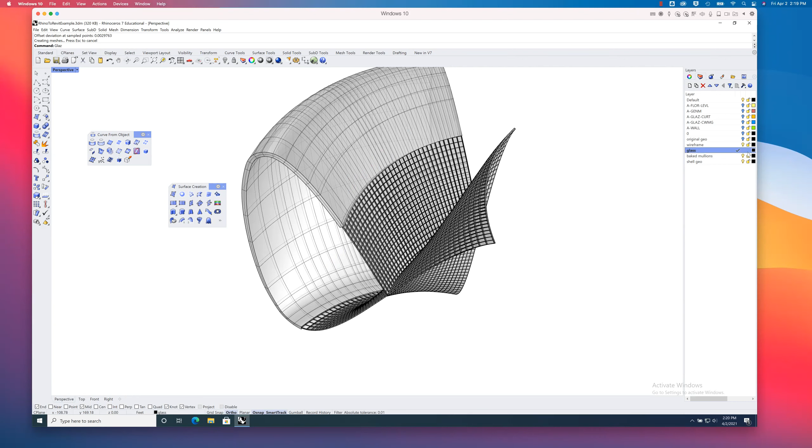Shell. All right, so let's do something with this shell. I'll open up Grasshopper again. There we go, Grasshopper. There, it's right there. Come on now.

Seriously. Ugh. Really? Could you be more obnoxious? There we are. Okay. Ugh, I thought Revit was bad. Damn. Forgotten how bad Grasshopper is sometimes. All right, so

Panelization. First of all, when I'm referring to Lunchbox Tools, I'm referring to a plugin for Grasshopper called Lunchbox Tools. So if you go to it, and I'll include a link to it here in a moment, basically it brings up the Lunchbox tab as one of the tabs in Grasshopper.

And it's able to turn large geometry, like a large surface, into a bunch of smaller ones. Here it already has some preset ones. You can do diagrid, hexagonal quads, random quads, skewed quads, staggered quads, triangulated in various fashion here, etc. Right? Diagrids, quad grids, you name it, they got it.

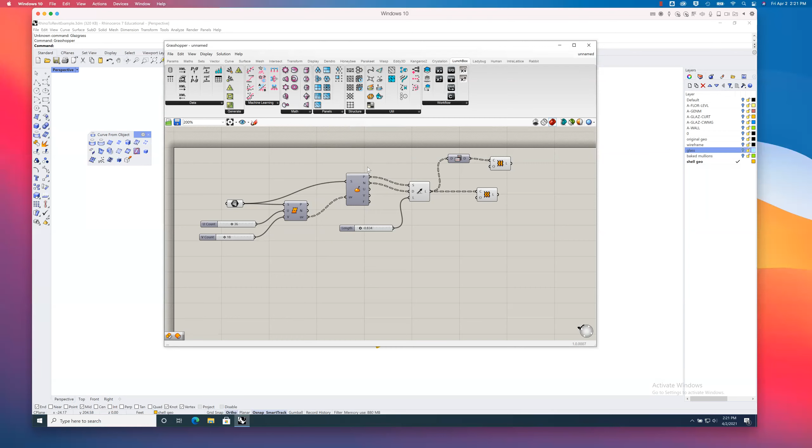Now, what's interesting here is that I'm dealing with a thickened surface, right? So this is actually a poly surface with a face on the outside and a face on the inside, and then all these side faces to close it up into a closed poly surface, right? And so I made something that actually takes that into consideration here.

If I open up the paneling tools, first of all, we start off with a B-rep, which is the fancy word for saying poly surface, right? And then what I do is I explode it and find all 1, 2, 3, 4, 5, 6 of its faces. Then I do each face one at a time and tell it how many times to divide with whichever panels widget I want. And I can just bake those panels in, pop them in the oven, and bake them back into Rhino. All right, so let's try that.

Let's say set one B-rep, and I'll go ahead and select this poly surface. So we have a closed poly surface, and we explode it and get the faces of the poly surface, right? So we get 6 surfaces, 6 untrimmed. Here's the faces of the B-rep. And I'm just going to pull one of them off each time, one at a time. So I'm going to pull the first item from that list by setting the integer to 0.

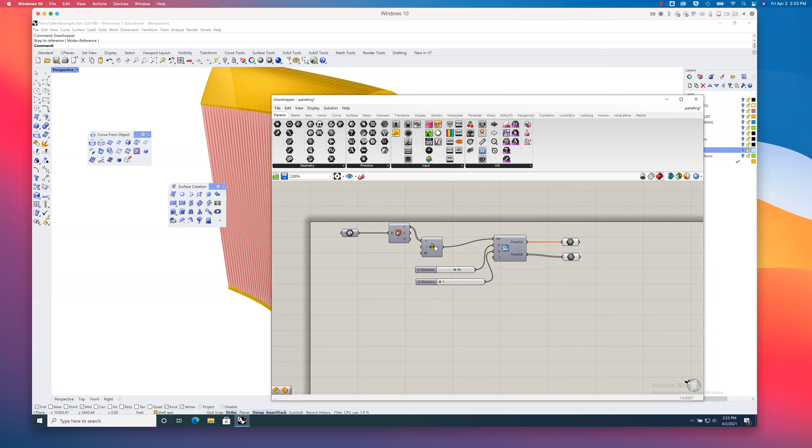Let's do that. I'll go ahead and select this. Turn this on. You can see, looks like it's that inside face. It's the first one here. See how it's green? Yeah. All right. Now I'm just telling it how many times to divide in each direction in order to turn this into a set of, in this case, a diagrid panel.

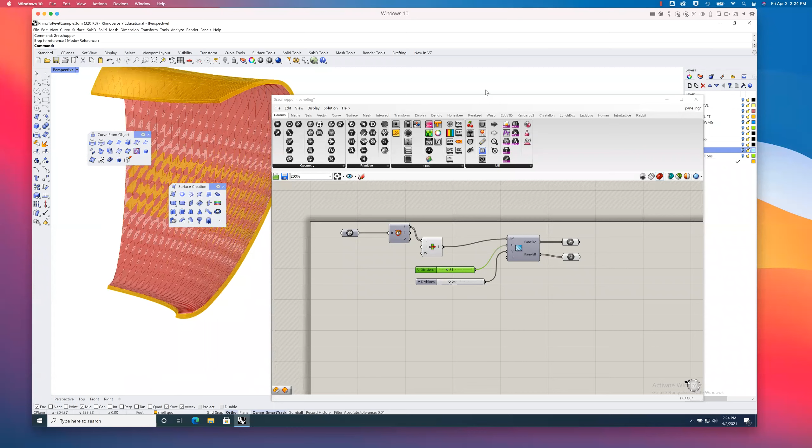Where it's sort of skewed. Was it called skewed quad or something? Yeah, skewed quads, of course. All right. So that's what that looks like. You can see they wrap all the way around the inside there. There's the shell geometry layer.

I'm going to make a quad panel layer, freshly baked quad panels. I can almost smell them. There we are. I'll make it red. Why not? All right, so here we have panels.

It also separates the edge panels, the ones that are just triangles, into the B panels. So we're going to have to bake both of these, right? Bake the ones that are full quads, and then the ones at the edges that are half quads, triangles. Fresh baked quad panels.

There we are. Always remember that. Fresh baked, I'll be like, what the hell was I thinking? Must have been hungry that day.

Okay, there we are. Now 24 and 24. I'm going to jot that down this time, be a little smarter, and actually write that down. 24 and 24. I'm going to change which face of the poly surface we're going to do now. Let me set this integer to, instead of the first item with an index of 0, the second item with an index of 1. That looks like it'll be the outside face.

Well, that's fitting. And you know what? I'm just going to leave that the exact same thing, 24 by 24. I'll go ahead and pop those panels in the oven, bake them away. There we are. Let's give those other panels some friends.

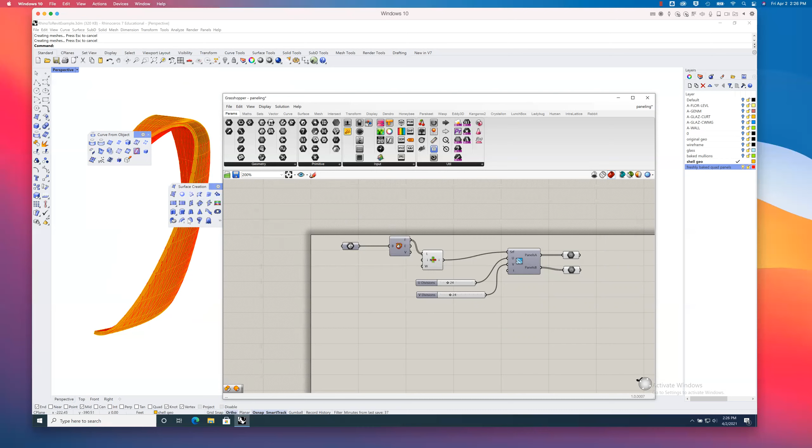Okay, so I'll change the integer number again, this time the index to 2, and the third item will be one of these edge surfaces here. It'll be ridiculously densely populated here. I'll show you, but it's really important that these things would wrap around, right? So I just want to show, where are they? No. Maybe I should actually, hold on, select these.

Untrimmed 552. That's a lot. Just try to highlight them green. Oh, it's along the bottom surface there. This isn't rotating very nicely, is it?

So I really only want 1 bay along here instead of 24 bays and 24 bays. So I went 24 bays in this direction, but only 1 bay in that direction. So now I just got to figure out which one of these I change to 1. It's that one. Oh, look, yeah. See, still matches up with these seams across, both on the outside and the inside, right? But it's only 1 bay going in that's really shallow direction.

Now it's telling me that there are no panel A panels, just B panels, just triangles. So go ahead and bake those in. Oh yeah, add them here. You know, after you bake them, you got to cool them down before you pop them in your mouth. There we go, all right.

Now I'll go back and change this index. I want the 4th item, so an index of 3. There we go. Just going to go around and do these, each one step by step. Going to look for the green highlights here. Let's see if I zoom out just a bit. Pan down. Looks like it might be this edge over here. Let me just turn it and find out. It sure is. Look at that.

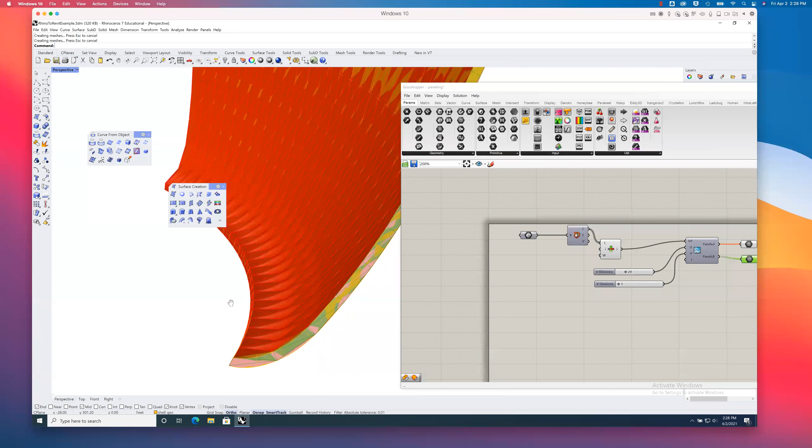Maybe, is that in the right direction? I think it's got to be. All right, so I'll go ahead and, or maybe not. Maybe I need to change this to 24 and the other one. Let me just double check that. No, clearly that's not correct. Okay, I'm overthinking this, I'll just bake this in.

All right, so I'm just going around and doing those edges. Oh, what? No, don't bake. Sorry, cancel, right click. Come on now.

Go down to the 5th object, the 5th edge. So I'll have an index of 4. That'll probably be up here at the top, maybe. I'm just going to guess. And I guess correct, look at that.

All right. Bakey McBake, let's make it by bake it.

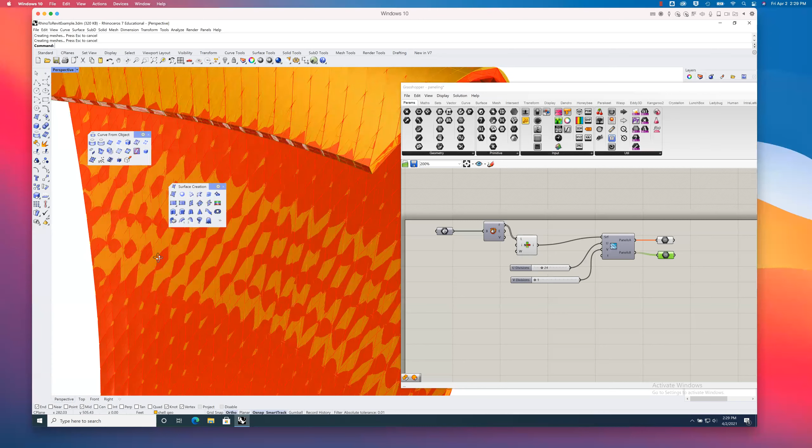Last but not least, the final edge. Da, da, da, dun, dun, dun, dun, dun. There it is. Yep, excellent. All right, so I'll bake this as well.

And let's see what we have here after I turn off Grasshopper. All right, so there's the skewed quad shell now, sort of converted into a set of panels, right?

Oh, that red is so saturated, it makes my teeth hurt just looking at it. Just turn down the color saturation a bit here. And let's see.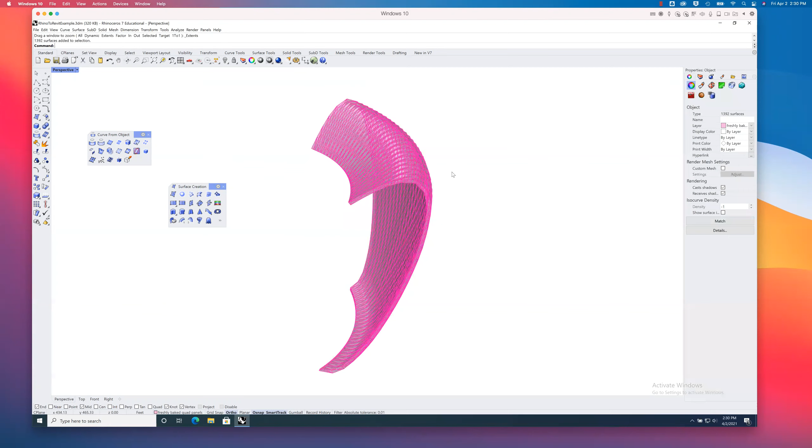Fit to screen, I'll select this stuff. Let's look at it without the isoparms. Just double check that patterning here, right? So there we are. Yeah.

So now you know how Herzog and de Meuron do it all the time. They just have Grasshopper and Lunchbox tools.

Same thing, if I wanted to do, instead of skewed panels, I wanted to do triangles or sort of quad panels that line up, make a grid, I could do that, etc. Right? So...

Again, I'll provide you with that file as well. So that's how I went from some strange geometry to some more architectural geometry. No less strange, no doubt, but more architectural. I'm trying to sort of break things down into pieces and trying to figure out how that would work. Glass, baked mullions.

Select objects. I'll turn off the isoparms on that. And on this as well, select objects.

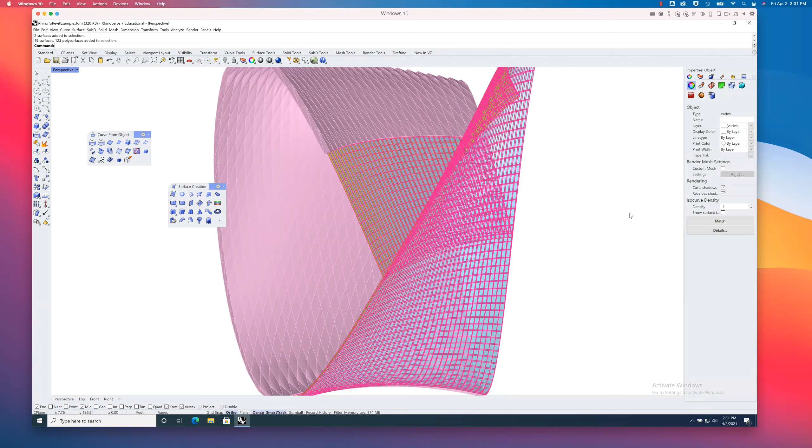So for this, Josh, like, how would you implement, say, like windows or a door? So here, let me explain how I would do that, right?

So no building, no piece of architecture to just put in a door right here, right? Like, say here's the ground and there's the door, right? So if I was to do that, I would probably have peeled this back, have it in here, the shell. I would walk under here past the rain screen where I see all the structure holding this onto the skin. And then I would integrate it into my curtain wall, right? Like, part of these curtain wall panels would just be like doors, right? And typically that's how you would see it, right? Does that make a little more sense?

So if I wanted to actually punch openings out, then of course I could do that. I would take some shapes and punch them out in this.

Then I basically inset some glass on the inside here. So if you think about this as being the opening that you have, you could easily situate a plane inside of here, even with a small frame around it, right? I might have some floor slabs popping in, pulled back. I'd probably need to show some railing and stuff in here and start to add people and furniture. Whereas out here, if this is outdoors, maybe I'm having some trees and stuff. This is Photoshop—trees, people.

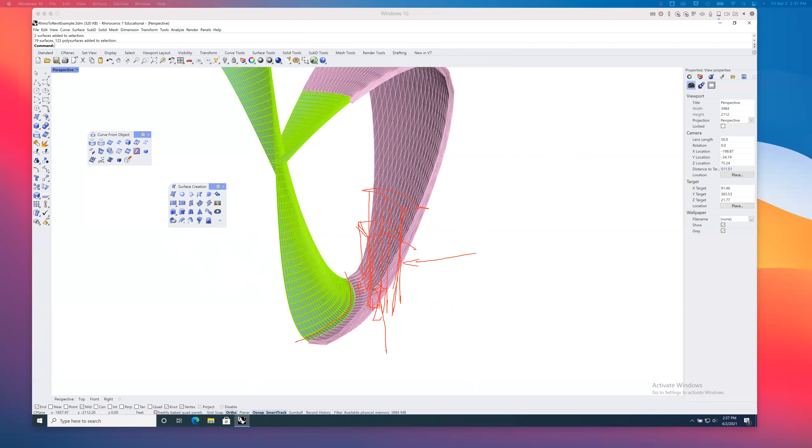Similarly, if it wasn't the whole facade, you could potentially punch an opening, and again sort of bring an architectural entrance into this thing. In places where weather is actually a consideration—we don't have a lot of weather—usually you have double doors, airlocks and things like that. But somehow, for some reason, we get away without having to do that here, even though it'd probably increase the efficiency of our air conditioning or cooling systems if we did.

All right, so that's another way of looking at it. Let me turn the annotate tools off for just a moment. There we go, try to spin this around. Come on, Rhino. Ah, here we go, sorry, I spun it around so many times, it's silly. Okay, I'm just waiting for this to react now. Oh boy, might be here for a minute.

If it's not a lot of work, could you actually put a window in there? Can you show us the step of that? Put it in here? Yeah.

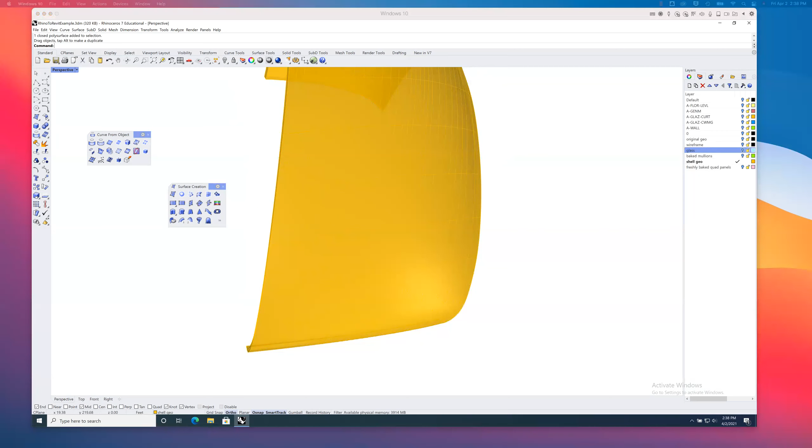So I'm thinking maybe a la, let's say like Norman Foster in Switzerland. There was that project he did. I'm not a huge Norman Foster fan, but when it comes to building systems, that guy has it going on. Norman Foster, cedar shingle.

Let's see. Maybe it's not cedar. There we go, yeah, Chesa Futura. So here we have a large shell with windows cut out of it, right?

So in that case, I could do it several different ways. It could be part of the surface geometry, or I could have something that looks like a grid superimposed on top of something that has nothing to do with the grid. I'll do it several different ways here.

I'm going to go into elevation just for a moment. Let's see what we have here. So let's take a look at this shell for a second. Come on, I only have the shell on, so it shouldn't be too hard here. All right.

So here's what I'm more or less thinking. What I'd probably start to do is draw a box in elevation, starting to delineate what these openings might look like and their extents.

Oy, okay, it's way back here. All right, that's fair, I guess. I'll go ahead and make those super deep for whatever reason.

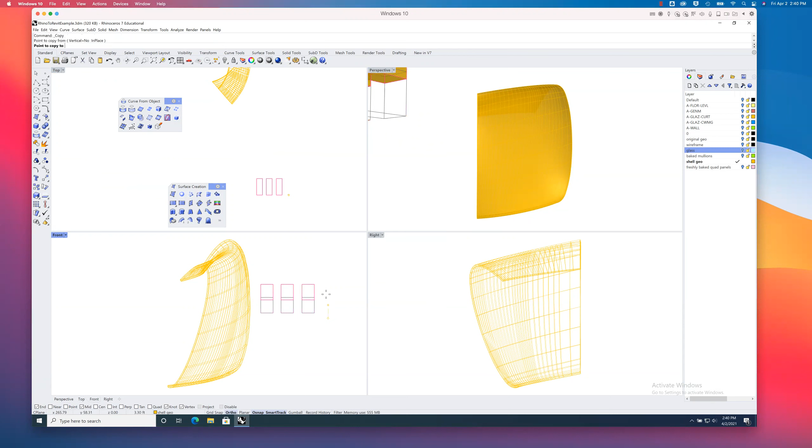So let's say I'm going to make a copy of these in a couple of places. Not that I think this is a good way of doing it, but I wouldn't want them to look like this necessarily. But I'm going to go ahead and move those over here and start to intersect them with this shell.

Ortho's on? Yeah, it sure is. Okay, let's turn that off.

Oh, Rhino's really... come on, Rhino. What's going on, Windows? Sometime today, preferably. I mean, I like Friday. I don't want to be doing this all day until it's Saturday.

Should have it better. Should be better. Come on, what's it doing? Oh, so it's Windows, not Rhino. I'll give this, Windows 10 is usually pretty responsive even when Rhino isn't. So this must be a Windows thing.

Yeah, sorry, I'm just waiting. I apologize it's taking so long. Anyway, what I would do is basically just start trimming things out.

You could do a Boolean command potentially if everything's solid and within a certain tolerance to be watertight and sort of manifold. If that's not the case, you could probably start to do some selective trimming out here and there. Use one to trim the other and then the other to trim the first again.

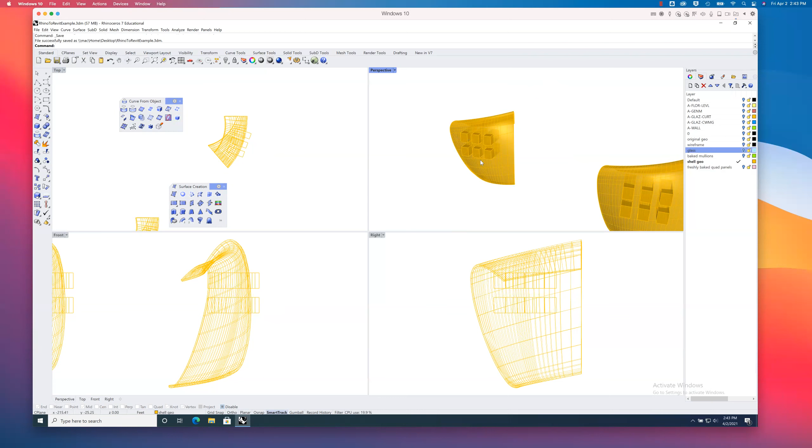In this case, I'm actually kind of inclined, since I know these are solids, to use the Boolean subtract, so Boolean difference. It says select the surface or polysurface to subtract from, there it is. And then to subtract with, so I'll select those. Poof. Right, and everything was trimmed out nicely as well. So I still maintain a solid. When I subtract a solid from a solid, I get a solid.

From there, maybe I need to put some glazing in. I can do surface from 2, 3, or 4 edge points, turn my object snaps on, and go to mid and find that midpoint, and that mid, and that mid, and that mid. Bam, now I have glazing, right? If I needed to do a frame, I could find the outline of that glazing and make a frame.

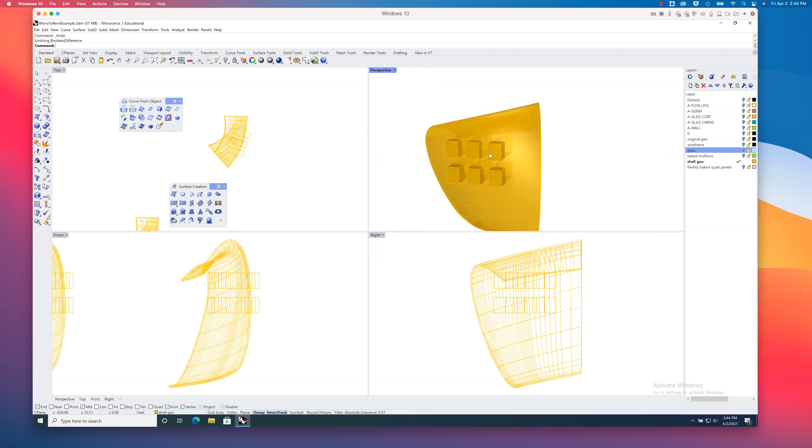Okay, let's say for some reason Boolean difference didn't work. I could basically manually do a Boolean difference. I'll do this in perspective really quickly. Hopefully you can see what's going on now.

No, really? Sorry, it's just become unresponsive again.

All I was going to do is, oh, no. Okay, sorry, there it is. I don't know what's going on here.

I would use this as a cutting object to trim these boxes one by one. Isn't that satisfying to see, like one by one? I don't know, something about it just... oop, I hit right click by accident. I wasn't done yet.

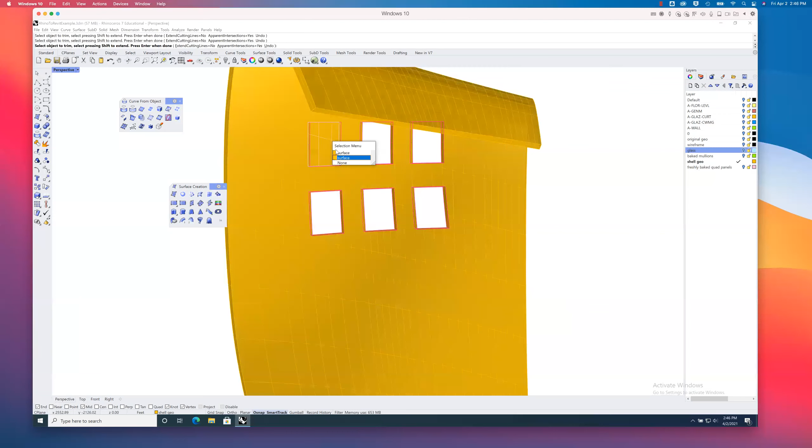Now I'll use these as cutting tools to cut this. Sure, whichever one, I don't care. Right, either way.

Another way of thinking about this is those are pretty divorced from the actual geometry, and there's nothing wrong with having a sort of interplay between the city grid and this non-grid-like geometry. But let's say there's something inherent about the flow of the surface and its internal geometry, so let's say I could begin to pull off isoparms.

So here I can get the isoparms, or even extract the entire wireframe if I want. Let me try to find a couple of places where I can do that. See there. And let's say there.

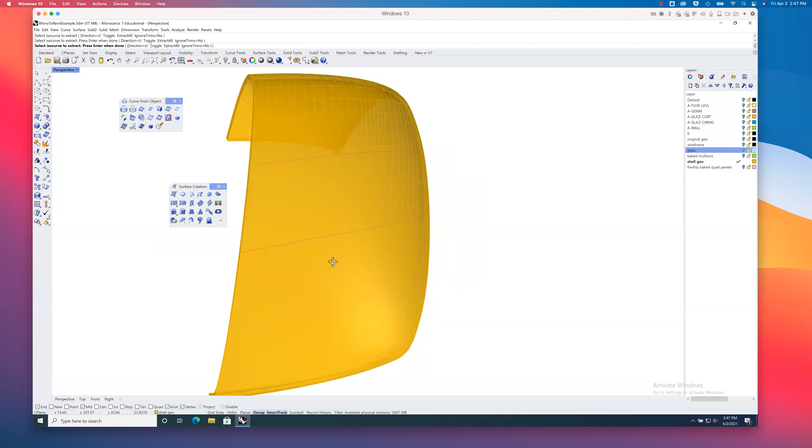And let's say direction, I'll toggle now to V and get some vertical ones in there.

I'm going to go ahead and use these to trim themselves up here. I'll try my best to select the curves and not the surface. That would be a disaster, wouldn't it?

I'll go ahead and join these into one closed curve. And then maybe I just need to extrude this out or something to cut an opening or trim.

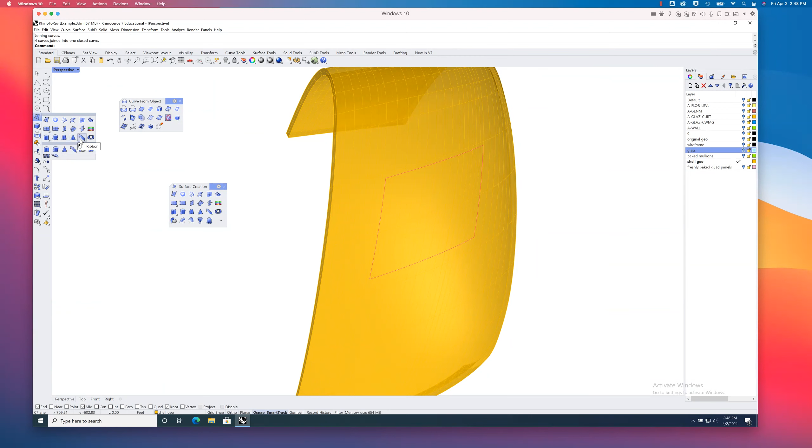Let's see, extrude tapered, extrude, blah blah blah. There's a number of different ways you can do this. Now, I'm probably not going to extrude in this direction, the Z, that's interesting.

Okay, so I'm going to go back out here to my four different vantage points and I'm going to change the direction and maybe do something a little more aligned with my geometry here.

Oh, no, it still didn't work. When the heck in the... oh, sorry, I'll try to act a little smarter. Direction, I'll turn off my ortho. Oh, it's already off. I'll turn off my object snaps, which seems to be throwing something off here. And I'll show direction. There we go.

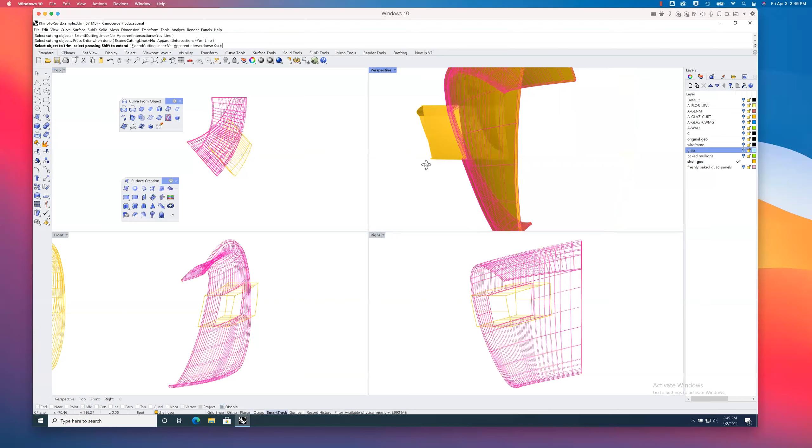Again, I could always do something like that, and then basically trim this crap out again. It's not crap, but you get the idea, right? I mean, trim, and then use this to trim that and that.

And then again, if I needed to put some glazing in here, I'd probably turn on my midpoint snaps again. I'll turn off knot, vertex, and end, and just try to find some midpoints here. There's one. There's another one. There and there. Right. Now I have... oh no, maybe it's not a good idea to do that.

There we go. I would just find... turn off midpoint here and turn on end. Now just start snapping this around, find isoparms along these edge surfaces that I made.

And then just connect those up with, yeah, so make sure that this snaps the end of that other one I did. And do the same thing here, right? And hope that they all line up here at the very, very end. Please. No, they do. I don't think that's a coincidence.

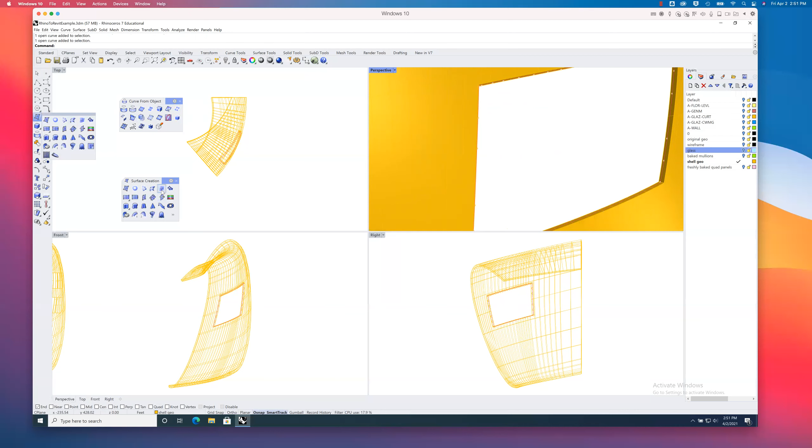All right, so now I could take these and make a surface from 2, 3, or 4 edge curves, right? Let's see, oh, it's right here. Boom, there we are. Ooh, ooh, ooh. All right.

Cool, yeah, that's what happens when you make something into something curved and the cuts are potentially curved as well. I should have known better than that.

Again, if I just needed to trim this off, I could have done that again with the isoparms. But oftentimes when I'm working with surfaces, you know, with double curvature, and you start trimming things away, I try to get those isoparms to use those to trim. Then I can start to offset things into thickness, or bring things into Revit, or bring things into Grasshopper.

Start to, you know, architect them a bit. You know, turn them into componentry.